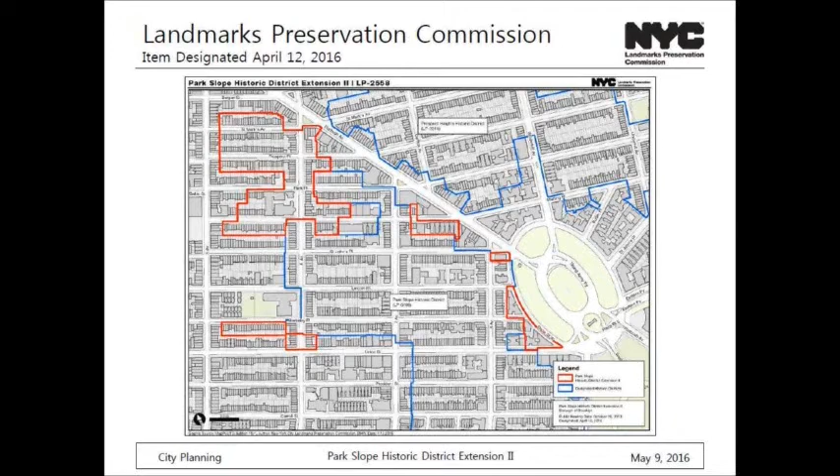This map, although it's a little difficult to see, outlines the existing Park Slope Historic District, the extension we did previously in 2012, and the extension 2 we're looking at today. It's a comprehensive map of the 5 sections of all the districts. The northern parts outlined in red are what we're looking at today. The first Park Slope Historic District extension, located to the south and east on this map, was designated in 2012. And the second extension today brings the total landmark buildings in Park Slope to 2,853.

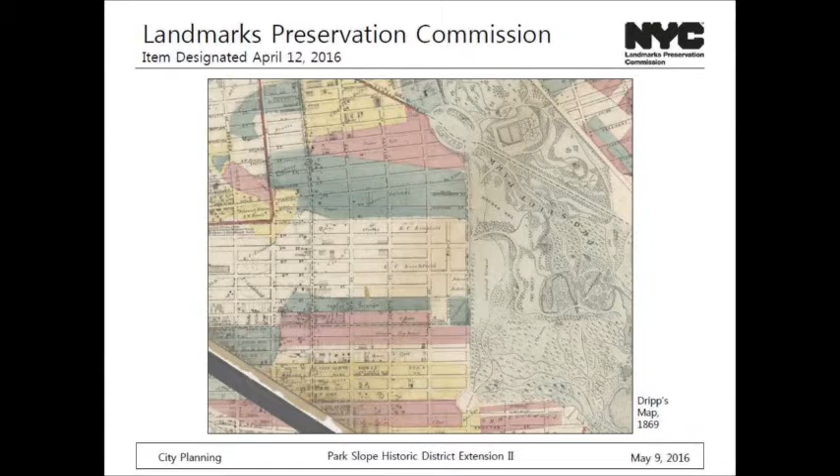The 2 most important features and factors that contributed to the growth of Park Slope during the late 19th century were transportation improvements and the development of Prospect Park, which opened in 1871. Residential development started in the area in the 1860s, close to Flatbush Avenue, as transportation improvements opened new links between Park Slope and the ferries along Brooklyn's waterfront.

The district steadily developed into masonry row houses between 1870 and the early 1900s. The interplay between the natural slope of the land and the graceful rows of well-designed stone houses make the district unique, like the previously designated Park Slope districts are. This extension also includes distinguished institutional buildings designed by some of Brooklyn's leading architects.

The historic district includes a catalog of mid to late 19th century styles, such as Italianate, Gothic Revival, Neo-Greek, Second Empire style, Queen Anne, Romanesque Revival, and Renaissance Revival style.

The Gothic Revival style St. Augustine's Roman Catholic Church is located at 6th Avenue and Sterling Place. The church and rectory were heard individually in 1966 and again in 1980. They've remained on the Commission's calendar since then and were part of the agency's backlog initiative under this administration. The action taken on April 12, 2016 to designate this district extension afforded the church and rectory landmark status, so these buildings were removed from the calendar of the Landmarks Preservation Commission as they fall within the boundaries of the district.

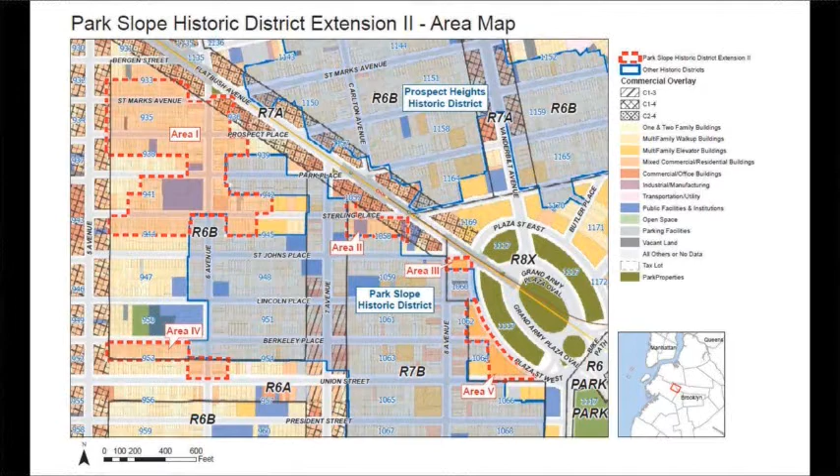Thank you, Jonah. Questions for Jonah? Ms. Efron: Thank you. Since the rezoning happened a number of years ago, were there any incidences the department's aware of economic hardship or other issues we should be aware of as we look at a much larger adjacent area?

I'm not aware of any economic hardships. I can speak to the fact that LPC held a public hearing, and there were groups of property owners and tenants who testified in support.

That's very good to hear. I'm not aware of any. Were there any testifying against it? There was one person who testified against it and deferred to staff from LPC.

Okay, great, thank you. Any other questions for Jonah? If not, this will go to a public hearing. Wednesday? Yes, Wednesday.

Thank you. So let's now move to item number 2, page 21. It's a series of proposed zoning text and zoning map amendments, special permits, and authorizations to facilitate the proposed special Hudson River Park District and the redevelopment of 550 Washington Street.

Our presenter is Carolina G. Hall, who is the lead project planner for the Manhattan office. We're on item number 2, page 21. Good afternoon, Commissioners. Today I'm presenting 2 applications for actions that are being proposed concurrently.

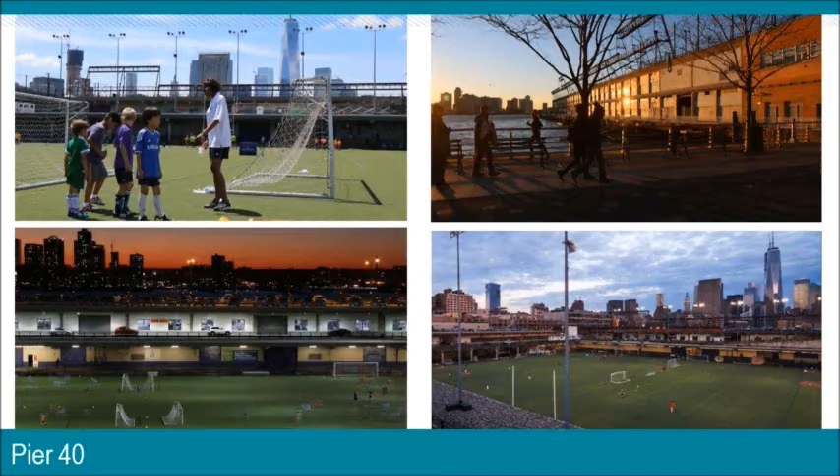As has been widely reported, Pier 40's piles and roof are significantly deteriorated. A 2015 engineering study found that more than half of the pier's 3,500 steel piles are in either severe condition or needing major repair. This is an image of one of the piles. Poor roof conditions have forced closure of parking areas, further limiting revenue. This is an image of an area of the pier closed due to deterioration. These are as much structural concerns as they are a threat to the financial viability of the larger park.

The Act does permit Pier 40 to be used for park commercial use. After 2 unsuccessful requests for proposal to redevelop the pier, and with the support of elected officials, the state amended the Act in 2013 to allow the sale of unused development rights to properties within 1 block east of the park, only to the extent permitted by local zoning law. The Act further requires that any revenue generated from the sale of these development rights be used first to repair Pier 40. The zoning text amendment proposed by the Department of City Planning would establish the Special Hudson River Park District to enable the transfer of floor area from Pier 40 to the receiving development site at the St. John's Center.

Pier 40 is located in the Hudson River at West Street and West Houston Street. The zoning lot, which includes land underwater, is 1.1 million square feet. The footprint of the pier structure, used to determine allowable floor area, is 672,328 square feet. The zoning lot is currently constructed with 2 stories and 673,000 square feet of floor area, so roughly half of its floor area is currently used.

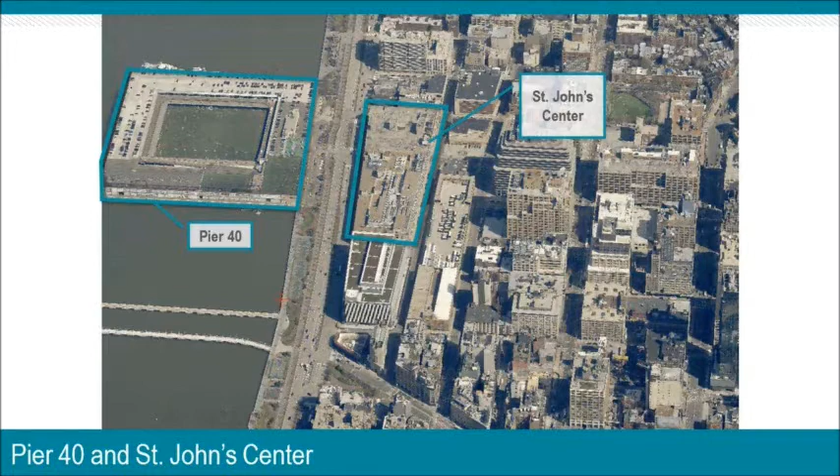The St. John's Center, or terminal site, across the street at 550 Washington Street, is a 213,654 square foot lot that spans 2 partial blocks between Clarkson, West Street, Washington Street, and a line just north of Spring Street. To the south is a sanitation facility. The single tax lot and zoning lot is bisected by West Houston Street, a mapped street, viewed right here. Deducting the area of the street, the zoning lot is 196,410 square feet.

The existing building was constructed beginning in 1934 and served as the southern terminus of the High Line, with railroad tracks entering the building on its 2nd floor. It is 4 stories and bridges over West Houston Street, which has 3 stories above it. The northern portion above West Houston Street is largely vacant. The southern portion of the building is currently occupied by back office communication uses and serves as a temporary event space.

Ground floor retail lines many of the main corridors, including Christopher, Hudson, Greenwich, and Canal Streets. Some manufacturing uses are still active on neighboring blocks. UPS operates a distribution facility on the super block just east of St. John's Center, and Federal Express has 2 smaller facilities just across to the north of Clarkson Street. Directly abutting the St. John's Center to the south is a newly opened Spring Street Department of Sanitation garage with a salt shed across at Spring Street.

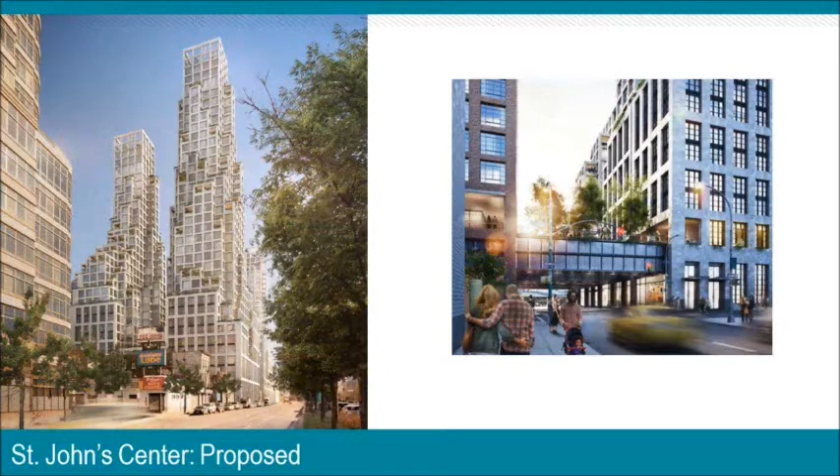The single zoning lot has been separated into 3 distinct sites: the north site, bounded by Clarkson Street, West Houston Street, and Washington Street; the center site, which extends for 406 feet to the south of West Houston Street; and the south site, which abuts the sanitation garage.

Beginning with the north site, it's proposed to include 2 buildings: the northwest building, fronting largely on West Street, Clarkson, and West Houston Streets, and the northeast building, fronting primarily on Washington Street. The northwest building is proposed to include 450,000 square feet of residential floor area and 100,000 square feet of retail space on the building's lower floors.

The building's main entrance is sited on Clarkson Street, and retail is accessed from West Houston Street. The building's street walls would rise between 91 and 127 feet, and then taper to one tower of 430 feet closer to West Street and one tower of 360 feet closer to Washington Street. The building is designed to graduate mass vertically to two tower tops of no more than 50 by 50 feet.

The northeast building on Washington Street, the second building on the north site, is 110,000 square feet in area and 175 feet tall. All the floor area in the building is proposed to be affordable to senior residents with incomes up to 80% of AMI. The applicant additionally proposes a 236-space accessory garage accessed by a 22-foot curb cut on West Street beneath the north site.

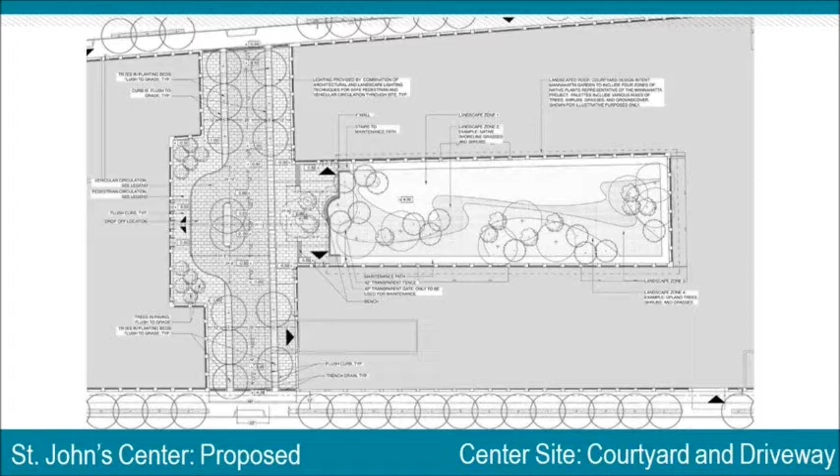The south site is 40,660 square feet in area and borders the Department of Sanitation garage to the south. The building is proposed to include 222,000 square feet of either office or hotel space, or a combination of both, plus 40,000 square feet of retail or event space.

A hotel on the site would rise to a maximum height of 240 feet on a low, full-coverage base. An office building would likely be lower than 240 feet, with larger floor plates throughout the height of the building. The envelope has been designed to allow both options.

On the ground level, the commercial building is separated from the sanitation garage by a service alley that will be used for loading and valet access, should the south site building be a hotel.

The cellar-level accessory garage is also proposed, with 164 spaces, and would be accessed from a 22-foot curb cut on West Street.

The Department of City Planning proposes an amendment to the zoning resolution to establish Article 8, Chapter 9, the Special Hudson River Park District, which would encompass Pier 40 as a granting site and St. John's Center as a receiving site.

Separately, the private applicant is seeking actions to develop the St. John's Center as described. The Special Hudson River Park District aims to facilitate the repair and rehabilitation of piers, bulkheads,

and infrastructure within the Hudson River Park, facilitating their maintenance and development through the transfer of development rights within the Special Hudson River Park District. It also aims to promote an appropriate range of uses that complements Hudson River Park, and, to the extent housing is included, to serve residents of varied income levels. As is consistent with all special districts, it also aims to promote the most desirable use of land and development in the area.

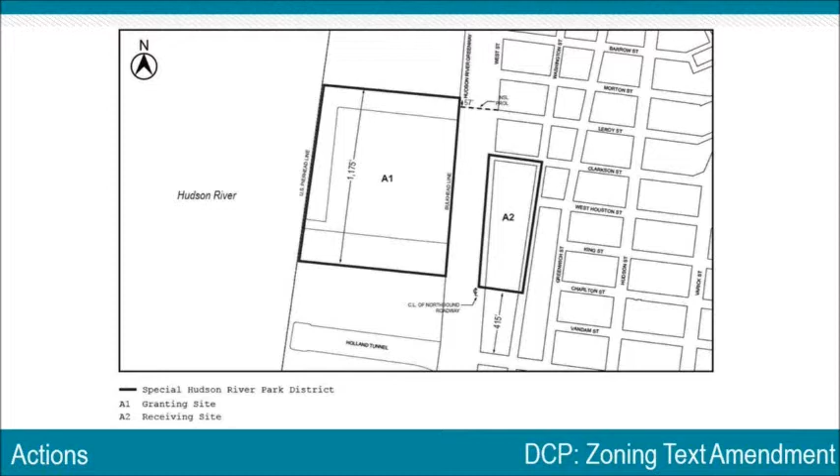The proposed text anticipates that, with the special permit, the owner of the receiving site may concurrently seek a zoning map amendment to allow additional uses or greater floor area. The proposed text conditions the effectiveness of the new zoning districts on the special permit. That is, absent construction pursuant to the special permit and the transferred floor area, the receiving site is restricted to the manufacturing zoning district regulations in place today.

There are requirements and conditions of the special permit. The Hudson River Park Trust must submit a letter to the commission identifying improvements and stating that the funds associated with the transfer of floor area, in addition to any other funds, are sufficient to complete the identified improvements.

The transferred floor area may be no greater than 20% of the underlying floor area permitted on the receiving site. The granting site and park improvements must be in the same community district as, or within half a mile of, the receiving site. And, very significantly, if the development on the receiving site includes residential floor area, the program must include affordable housing in accordance with mandatory inclusionary housing.

The grant of the special permit is contingent on a set of findings with respect to the furtherance of Hudson River Park's repair, maintenance, and development, and on the receiving site, an improved site plan and building design, complementary uses, provision of light and air to surrounding streets, and the appropriateness of bulk modifications in relation to park improvements, and the ability of the project to support the objectives of the inclusionary housing program.

The Special Hudson River Park District also creates 2 chairperson certifications to ensure that no building permits or certificates of occupancy can be issued until the chair has certified that the receiving site owner and the trust have executed a payment schedule and that payments are maintained in accordance with that schedule.

The private applicant also proposes several actions, including the zoning map amendment, a special permit pursuant to the New Hudson River Park Trust Act text, a special permit for additional parking for 3 parking facilities, 3 authorizations for curb cuts, as well as a chairperson certification.

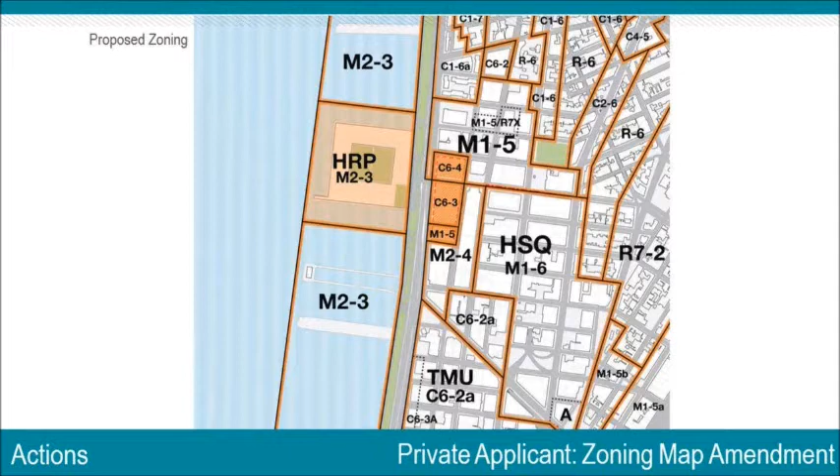As noted, the new zoning districts, if granted, would be ineffective absent the use of the special permit. The private applicant seeks a special permit pursuant to Section 8921 in the Special Hudson River Park text proposed by the Department of City Planning.

The special permit would allow the transfer of 200,000 square feet from Pier 40 to the St. John Center. Pier 40 is zoned an M2-3 district with 2 FAR and 1,344,656 square feet of floor area, of which 671,582 square feet are unused today.

200,000 square feet constitutes 13.2% of the floor area permitted by the underlying regulations on the receiving site. The transfer floor area would enable improvements to Pier 40, in support of which the trust has provided a letter to the commission. Under the special permit, the applicant also seeks modification of bulk requirements.

In terms of height, the proposed C6-4, C6-3, and M1-5 districts allow heights regulated by the sky exposure plane. On all 3 sites, the proposed building envelopes penetrate the sky exposure plane as measured from the zoning lots bounding streets, including West Houston Street.

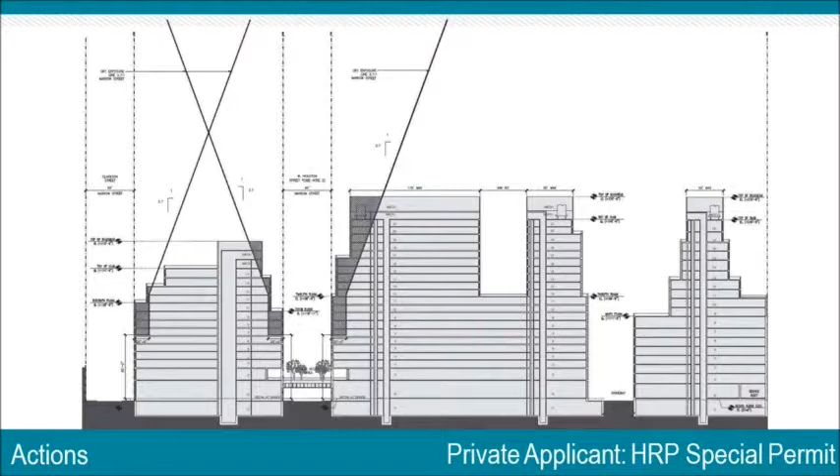A waiver of street walls is also sought. In C64, C63, and M15 districts, all districts permit a maximum base height of 85 feet.

Adjacent Special Hudson Square district regulations allow street walls of up to 150 feet on wide streets and 125 feet on narrow streets. The north site is proposed to include buildings with street walls of between 115 and 129 feet.

The center site would include street walls of between 102 and 209 feet, and the south site has street walls of 112 feet.

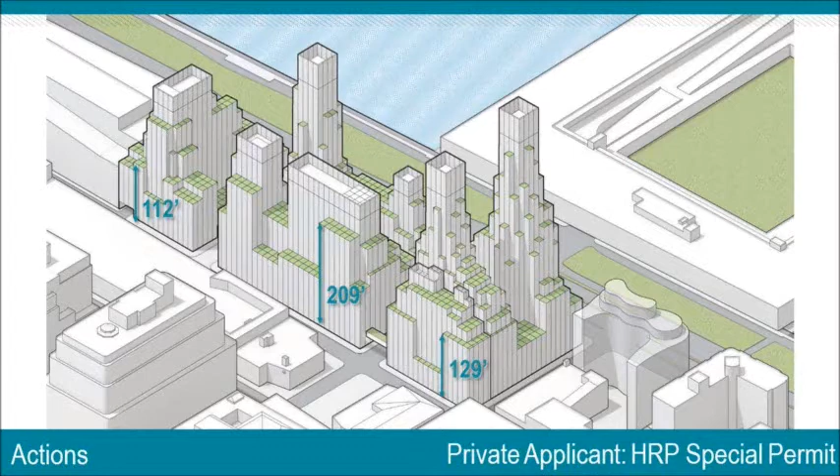Many of these street walls incorporate lower recesses to articulate the facade and match the character of nearby lofts. The street walls are also proposed to reflect the height of adjacent structures like the sanitation garage to the south.

The center site is proposed to be zoned in a C63 district where height factor regulations consider floor area, building height, and open space to encourage a tower in the park with smaller footprints and taller building heights.

The center site is proposed to be constructed with 7.52 FAR plus the transferred floor area. Based on this proposed floor area, height factor calculations would permit a lot coverage of 56,000 square feet, whereas the center site buildings would have a lot coverage of 67,000 square feet. As shown here, therefore, a waiver or modification of height and lot coverage requirements is sought.

The south site building, proposed in an M15 district, is designed not to include a 40-foot rear yard that would be required in the middle of the block, as shown here in the shaded area. The required rear yard is suitable for a typical street context to provide separation from neighboring buildings. However, the site plan and building design include separation from neighboring buildings here.

Typically, special permits that are not vested expire after 4 years. Given the size and complexity of the development, existing site conditions that will require substantial work before foundation is constructed, as well as current tenancies on the site, the applicant asks that the commission grant the special permit for a period of 10 years rather than 4 years.

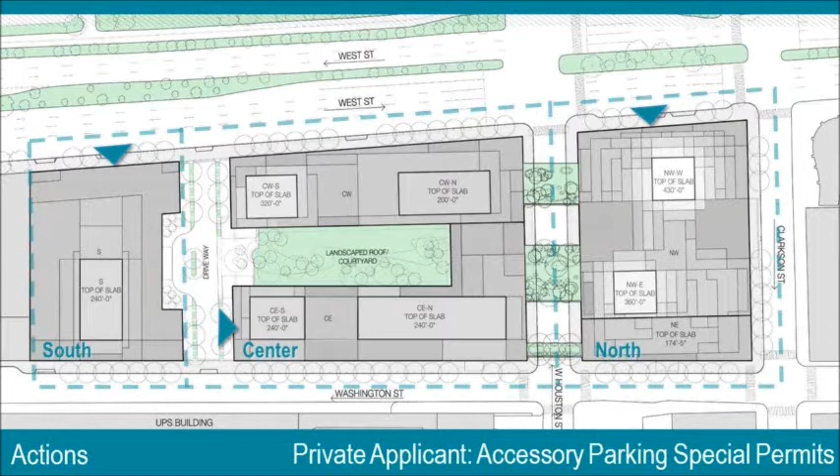The applicant seeks 3 authorizations pursuant to Section 13-441 to allow curb cuts on West Street, a wide street, at 3 locations: one to access the north site garage, one in order to access the through-block driveway along West Street, and another 22-foot curb cut to access the south site garage.

Finally, the applicant is also seeking a chairperson certification pursuant to the new Special Hudson River Park District, Section 89-21, to ensure that building permits may only be issued by the Department of Buildings once a payment schedule associated with the transfer of floor area has been jointly executed by the owner of the receiving site and the trust.

So with respect to environmental review, the DEIS identified significant adverse impacts with respect to vehicular traffic, open space, construction, air quality, and noise. The traffic analysis identified the potential for significant adverse impacts at up to 11 intersections for the proposed project. Unmitigated impacts remain at up to 5 locations.

Any additional mitigation will be explored in consultation with the Department of Transportation between the draft and the final EIS. The proposed actions would additionally reduce the total and active open space ratios. Potential mitigation measures will be explored between the draft and final EIS with the Department of Parks and Recreation. Equally, the potential for construction, air quality, and noise impacts will also be further explored between the draft and final EIS.

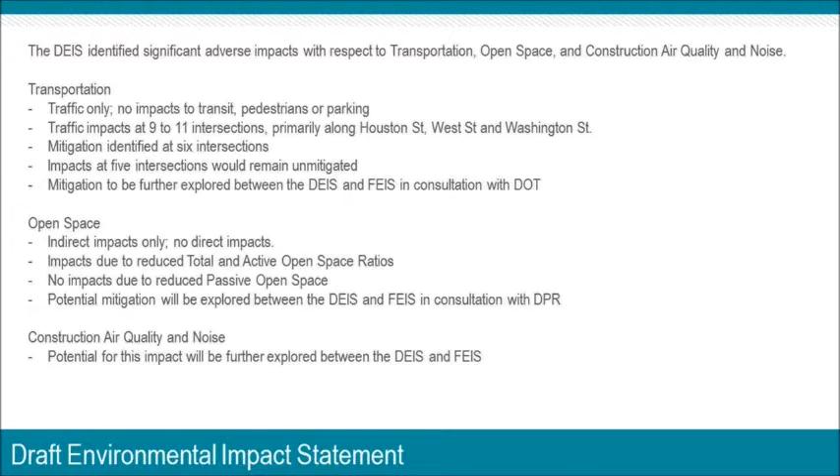In summary, the proposed text amendment by the Department of City Planning and actions by the private applicant will help enable the repair of Pier 40, a critical asset to Hudson River Park, will revitalize a large and prominent waterfront site near Hudson Square, and will contribute to the diversity of the city's housing stock.

Thank you very much, Carolina. That was extremely well done and comprehensive. Questions? No questions. That was really a remarkable performance.

Mr. Cantor. I'm not gonna let her get away that easy. Good show. Question, please.

What is the tallest buildings immediately east of the highway, currently? I'm trying to learn what these two towers, particularly the two tallest towers, how they relate to anything else along the waterfront. I'll go to you. Yeah, that would be a good slide.

So currently, the tallest building, I believe this building in the Special Hudson Square District, rises to 260 feet. The highest portion of the buildings proposed would rise to 430 feet. 430 feet is also the proposed or permitted height at Duarte Square in the Special Hudson Square District, located on Canal Street and Avenue of the Americas, two wide streets. Similarly here, West Street is a wide street, also located on the water, affording an opportunity to locate a taller building.

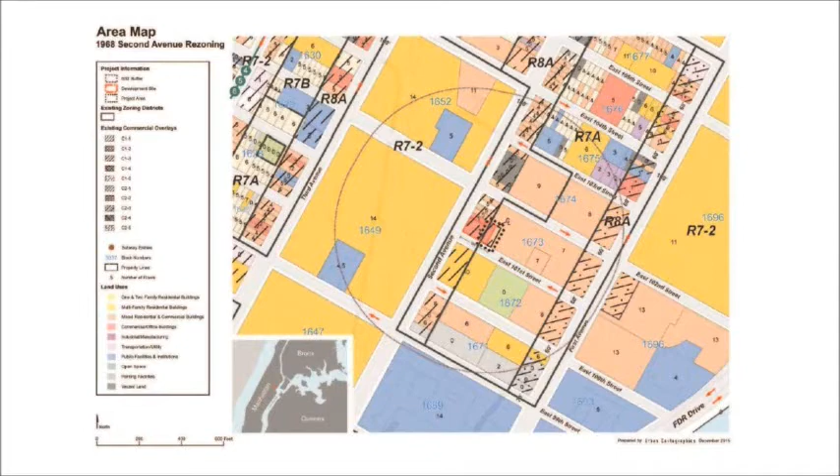The site is located on the east side of Second Avenue, between East 101st and East 102nd Street. The site is also situated on part of lots 1 and 6 on block 1673. On site currently is a 2-story commercial building with a mezzanine, a cellar, and a loading dock located on East 101st Street. The second floor contains vacant office space, and there is a supermarket on the ground floor which uses the mezzanine, the cellar, and the loading dock.

As you can see, the loading dock is on the lower left-hand side of the picture, and is currently located outside of the commercial overlay, along with a portion of the entire building, which is outside of the commercial overlay.

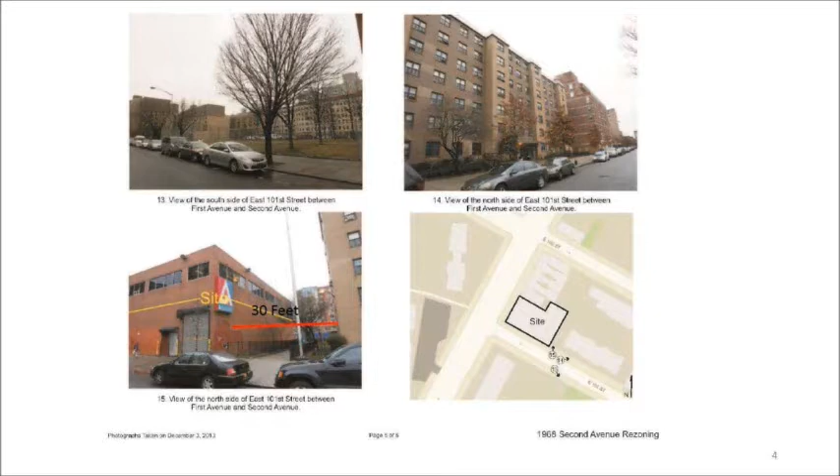Lot 1 is completely occupied by 1968 Second Avenue. And this is Second Avenue, of course, and this is 101st Street. The building is 34 feet 6 inches tall and contains approximately 29,990 square feet, and the loading dock is located 125 feet from Second Avenue.

The commercial overlay only extends 100 feet into the block, so the red line represents where it currently is located. The extension of the C1-5 commercial overlay would extend that overlay 55 feet into an R7A zoning district and give the loading dock the required 30 feet distance from a residential district, and it will cover the remaining 25 feet of the two-story building which is currently located beyond the commercial overlay.

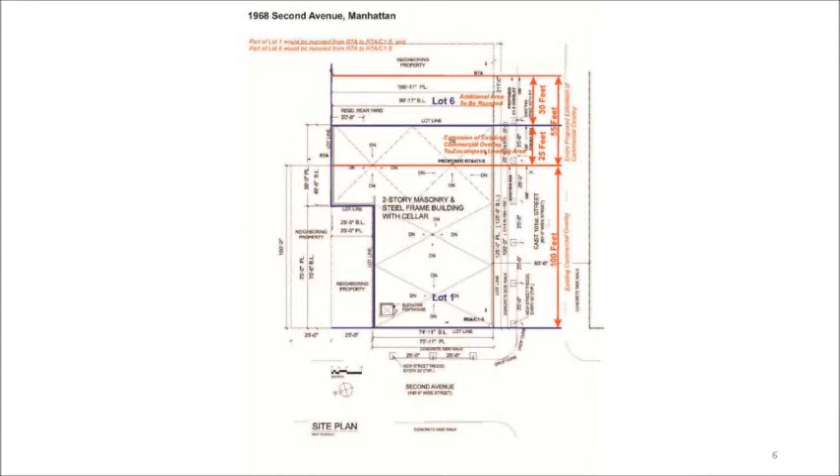Because the proposed zoning map amendment is sought only to bring the existing building into conformance and compliance, the proposed action is not intended to result in any new development or enlargement of the building on the site.

Questions? More questions on this than on St. John's. All right, I'm going to start with Ms. de la Uz. It's a short one.

I just have a lot of supermarket on my mind lately. Do we happen to know what the remaining length of lease is for the existing supermarket operator? And is there any thought to, if this were to move forward, ensuring that the supermarket use would continue? Well, the supermarket's been here for 11 years. I don't know if there is any thought to changing the use, but as far as my knowledge today, I would say no to that.

That would be a concern. Ms. Levin.

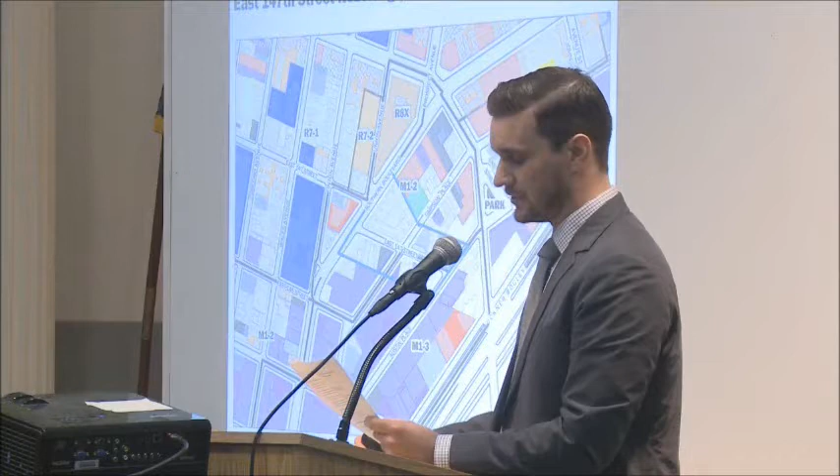In addition, the area contains several vacant lots, 2 small residential buildings of 3 stories, located on the corner of East 145th and Timpson, surrounded by vacant lots and 1-story garages. To the west, several 6 to 8-story apartment buildings line Union Avenue between 149th and 147th Street.

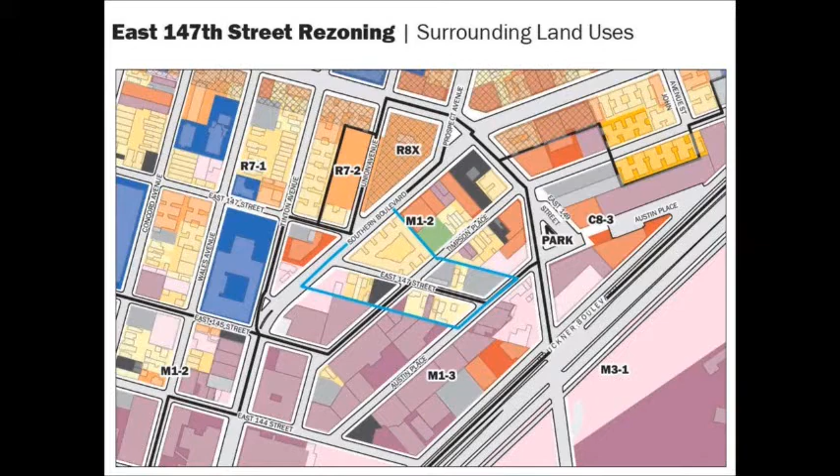North of the project area are M12 and R71 districts with a C14 overlay along Prospect Avenue and Southern Boulevard. This area contains 1-story commercial buildings, a funeral home, a house of worship, and 4 and 5-story mixed buildings. Additionally, a 14-story residential building is currently under construction on the corner of 149th and Prospect Avenue, the project previously referred to as Crossroads Plaza.

The existing zoning within the rezoning area is M12 and M13. Currently, M12 districts allow the development of industrial and commercial uses up to 2.0 FAR, and the M13 district allows these same uses up to 5.0 FAR. Each district allows some community facility uses up to 4.8 and 6.5 FAR, respectively.

Neither district requires side yards, but both require 20-foot rear yards. M12 districts allow front walls of 60 feet or 4 stories, whichever is less, before requiring stepping back in accordance with the sky exposure plane. And the M13 district allows front walls of 85 feet or 6 stories, whichever is less, before requiring stepping back in accordance with the sky exposure plane.

Each district requires parking, the amount of which depends on the use, ranging from one space per 300 square feet to 1 space per 1,000 square feet.

The proposed R7X district would permit residential uses up to 6.0 FAR in inclusionary housing districts, as is proposed here, with a height limit of 145 feet. 1 parking space is required for every 0.5 units, with no parking requirement for income-restricted units. The R7X district would not impose a requirement for a side yard, but would require a 30-foot rear yard.

A proposed C14 district is proposed along Southern Boulevard and would allow neighborhood-serving commercial uses, and within the R7X district, a maximum of 2.0 FAR. The overlay is not associated with the application's proposed development project.

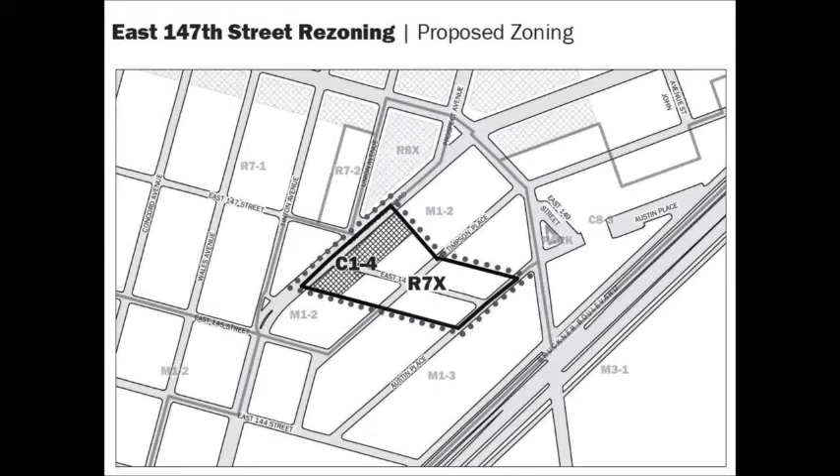The proposed development site is a combination of 4 tax lots totaling just over 24,000 square feet, on 147th Street's northern frontage between Timpson and Austin Place. The site is currently zoned M12, and currently contains a one-story parking garage and surface parking totaling approximately 50 spaces. Additionally, there are two lots of the development site that contain small unoccupied residential buildings.

The applicant is proposing a 12-story residential building that will rise to a maximum height of 125 feet, totaling 164,000 square feet of development, in compliance with the R7X district's permitted 6.0 FAR.

To facilitate the development of the project, the applicant is utilizing the 4% low-income housing tax credits bond cap and is seeking subsidies from the New York City Department of Housing Preservation and Development and the New York City Housing Development Corporation. The applicant proposes to construct 165 affordable dwelling units under HPD's Extremely Low and Low Income Affordability, or ELLA, program. The proposal includes 25 below-grade parking spaces.

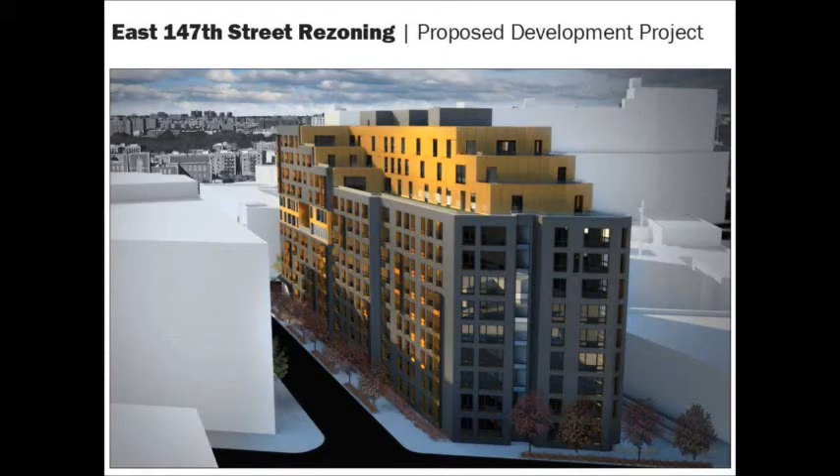The ground floor of the proposed development will consist of a lobby and residential amenities such as a community room and laundry facilities. Typical floor plans include a mix of dwelling unit sizes that range between studio units and 3-bedroom units. The proposed development consists of 3 main vertical sections that create a continuous street wall and rise incrementally.

The building rises in 3 level changes between floors 1 through 6, 6 through 9, and 9 through 12, and peaks at the southwest corner of the development site. The proposed development would have a base height of 85 feet, with floors 6 through 12 stepping back from the building's northern edge, and floors 9 through 12 stepping back from the building's eastern edge.

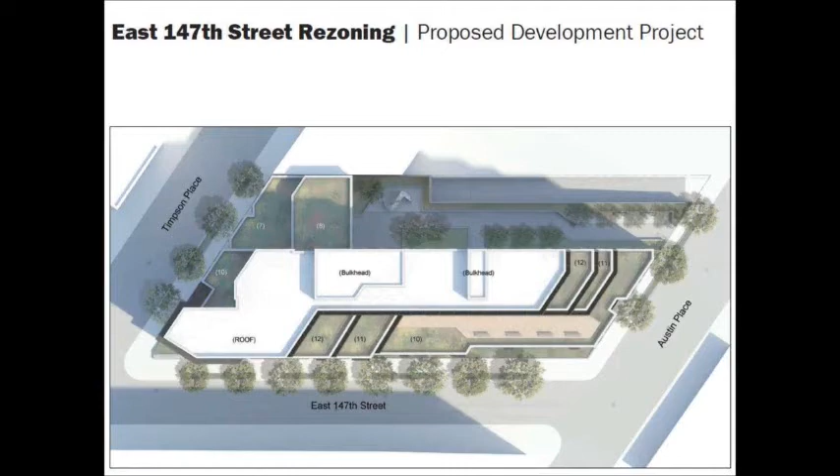In closing, the applicant seeks a rezoning of the project area from M12 and M13 to R7X, and M12 and M13 to R7X/C14. In addition to the proposed mapping action, a zoning text amendment is being proposed to designate the project area as a mandatory inclusionary housing area.

The proposed project is recommending the application of options 1 and 2. The proposed C14 commercial overlay along Southern Boulevard will allow a continuous strip of commercial uses to serve nearby residents, extending from existing commercial uses north of East 147th Street along the east side of Southern Boulevard. The proposed zoning map change is necessary because current zoning does not permit residential uses. Finally, the proposed overlay will allow neighborhood-serving retail to locate along Southern Boulevard.

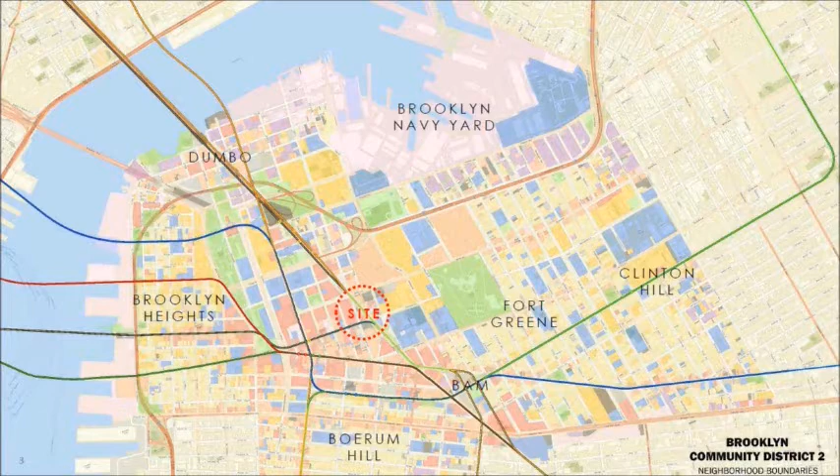Together, these applications would facilitate the development of a new 372,000 square foot mixed retail, office, and residential development located in downtown Brooklyn, Community District 2. The proposed project area is located in the middle of downtown Brooklyn, New York City's third largest central business district, and Brooklyn's burgeoning tech triangle, which includes downtown Brooklyn, Dumbo, and the Brooklyn Navy Yard.

The site, 141 Willoughby Street, is located on a triangular block bound by the 120-foot wide Flatbush Avenue extension, 60-foot Gold Street to the west, and the soon-to-be 75-foot wide Willoughby Street to the south. The Manhattan Bridge is approximately 6 blocks north along Flatbush Avenue extension. Immediately south of the proposed site is the 1.9 million square foot mixed retail and residential City Point development, which is currently under construction, and will also begin construction of Phase 3, which is a 59-story tower about 712 feet along Willoughby Street.

Diagonally southwest is the recently approved 1-acre Willoughby Square open space with a public parking garage below, and the proposed 420 Albee Square office tower development, which is a separate application you're going to hear next on the agenda. Directly west of 141 Willoughby Street is 4 Metro Tech, a 1.3 million square foot, 25-story office building that Chase Bank is an anchor tenant in.

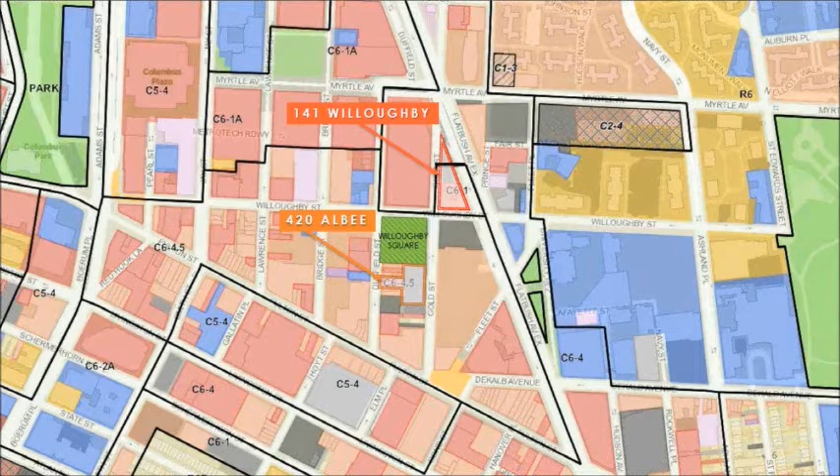The proposed project area was actually slated to be rezoned from the current C61 to a C64 district at that time. However, in response to public testimony by the site's then owner, the Institute of Design and Construction, they requested to be removed from the rezoning, as they had no intention of selling or redeveloping the site at that time. Lot 8 was acquired by HPD in 1989 as part of the Metro Tech URP and was designated for a street widening as part of the Flatbush Avenue Extension enlargement. It was subsequently mapped as street. However, in 2004, as part of the Downtown Brooklyn Plan, the URP modified Lot 8's designation to open space and authorized HPD to dispose of the property.

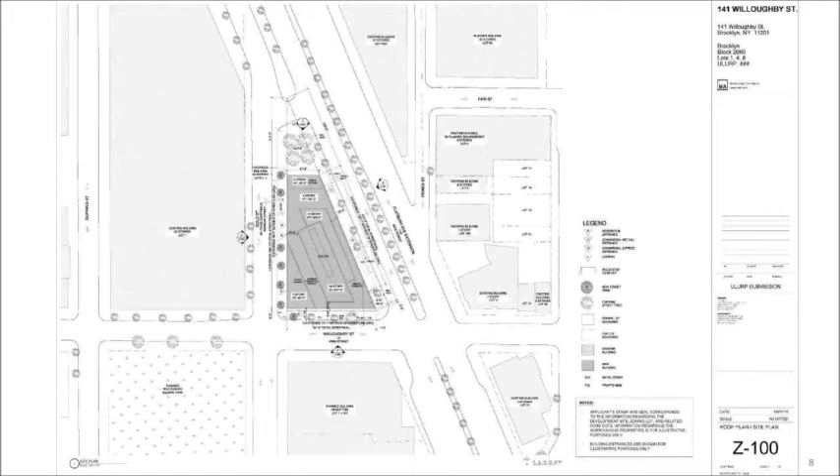If the actions are approved, the applicant, Savanna Equities, is proposing to develop a new 49-story, 577-foot high, 18 FAR, approximately 372,000 square foot mixed retail, office, and residential development on lots 1 and 4, and a publicly accessible open space on lot 8.

The proposed development would include approximately 30,000 square feet of retail across the ground and second floors, approximately 94,000 square feet of office space across 7 floors, and approximately 248,000 square feet of residential floor area, including approximately 74,000 square feet of affordable floor area pursuant to a proposed MIH area.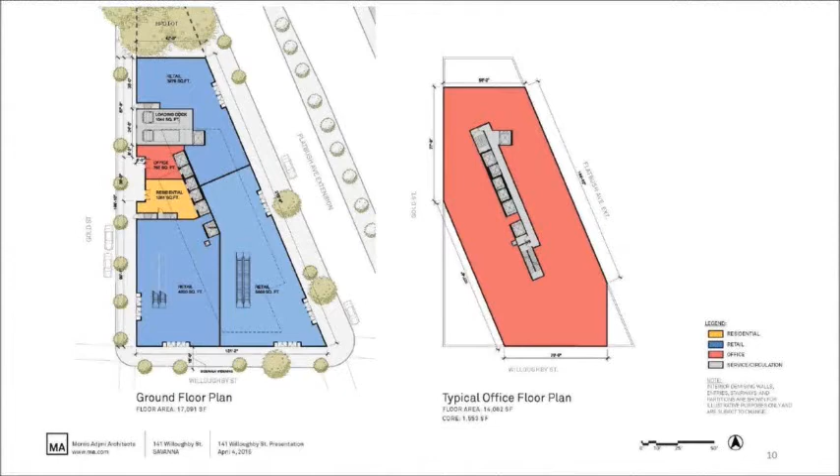This demand and subsequent inability to find office space has caused a ripple effect of office conversions and expansions across Brooklyn's neighborhoods. So this massing shows the proposed retail base and entrances and the office podium with the proposed open space terraces. And here's the location of the proposed publicly accessible open space on lot 8.

This applicant is also proposing to map downtown Brooklyn's first MIH area, proposing option 2, which would require 30%, or approximately 74,400 square feet of residential floor area, to be permanently affordable. As stated before, it should be noted that the existing C61 district has no affordable housing program currently. And the MIH proposal is significantly higher than the current R10 inclusionary housing program that currently exists in downtown Brooklyn, which relies on the older 5 to 6% affordable housing provisions.

So here's a massing showing the proposed commercial podium and residential tower in context. Here's Metro Tech just behind it, which you can see here. And this is the City Point Phase 3 tower just behind it here.

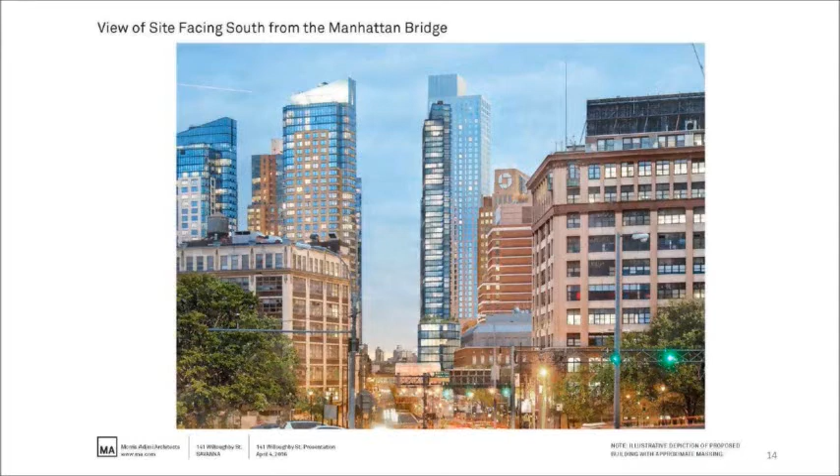So the proposed development site sits at a very prominent location in downtown Brooklyn along Flatbush Avenue Extension near the Manhattan Bridge. This is a view from the Manhattan Bridge landing at Flatbush Avenue in northern downtown Brooklyn.

The proposed development provides a strong street wall along Flatbush Avenue Extension with a lower base height of 40 feet, a small setback, and then rising to 145 feet. A 144-foot linear portion of the commercial base rises sheer from Flatbush Avenue Extension - that's this right here. Flatbush Avenue Extension is 120 feet wide.

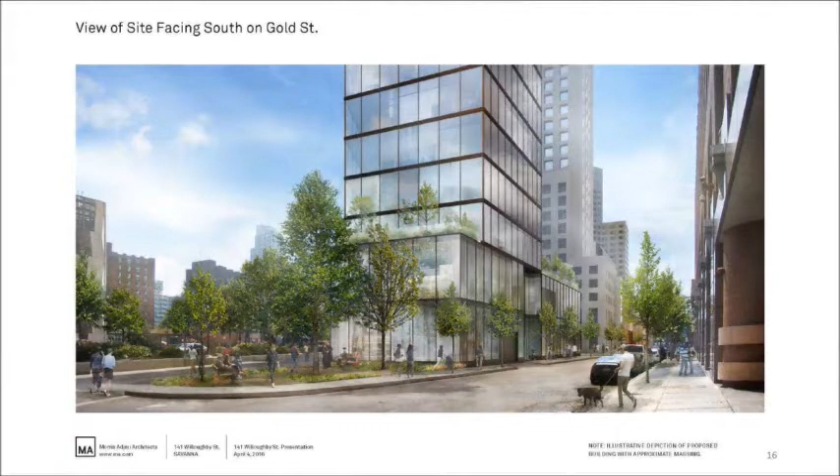The prow of the proposed development provides a slender 40 to 47 foot wide face as one approaches from the Manhattan Bridge. And here's another view of the proposed publicly accessible open space on Lot 8.

The proposed 577-foot tower is in relative context to existing and proposed developments within the immediate area, including new developments topped out on Willoughby Street, City Point's Phase 3, and the proposed 340 Flatbush Extension development, which recently transferred development rights from the landmark Dime Savings Bank to achieve a proposed 1,000-foot tower.

In order to facilitate the proposed development, the private applicant is proposing a zoning map amendment and zoning text amendments, and EDC and HPD are proposing a city map change to demap a portion of Flatbush Avenue Extension over Lot 8.

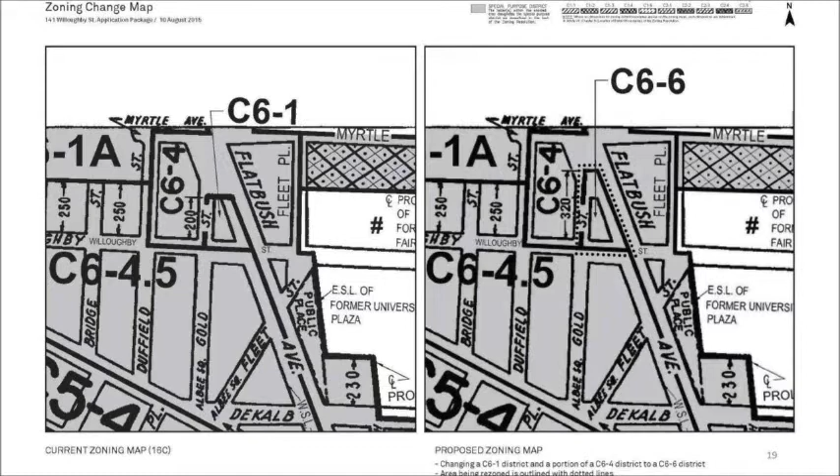This rezoning would rezone a C61 district and a small portion of the C64 district to a C66 district, which would cover all of lots 1, 4, and 8.

In addition, the applicant is proposing text amendments, which include designation of downtown Brooklyn's first MIH area in Appendix F, adding the proposed C66 district to the Special Downtown Brooklyn District, Section 101.

As noted earlier, the existing C61 has no IH program associated with it, and the applicants would develop affordable housing pursuant to any future 421A agreement.

But in this proposed scenario, the C66 district would have an R10 equivalent, in which the applicant is proposing to designate the 30% requirement per option 2, which would generate approximately 81 affordable rental units.

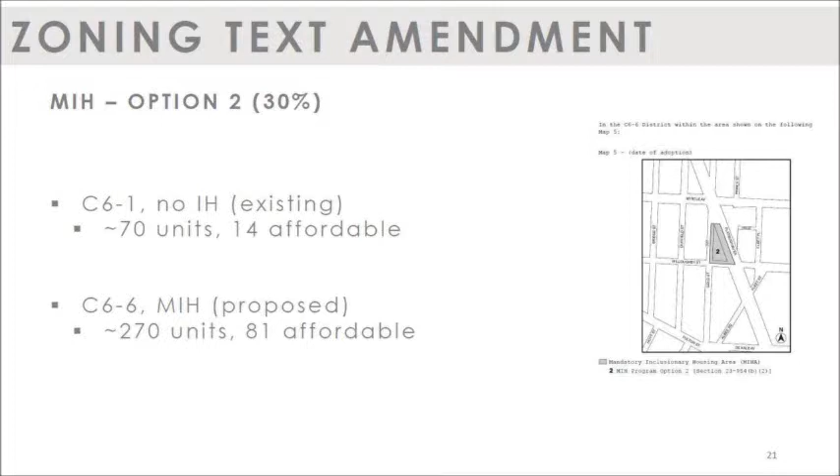The C66 district would allow up to 18 FAR, which would facilitate the creation of a significant amount of office space above ground floor retail spaces.

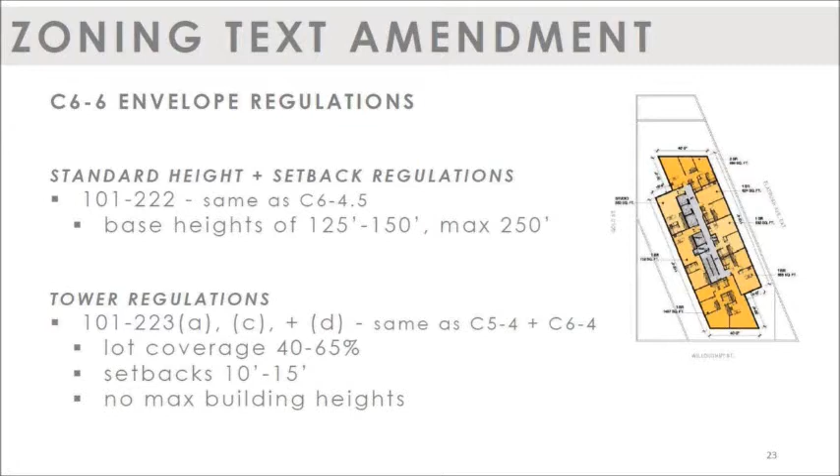The C66 district would have to be added to the Special Downtown Brooklyn District, and therefore modify some of the locations within the envelope regulations applying in the Special Downtown Brooklyn District. It should be noted that the standard height and setback regulations and the majority of the tower regulations would remain unchanged - it's just plugging in the C66 district.

However, related to setback regulations in 101-223 and 101-41, to facilitate the creation of more efficient office floor plates, the applicants are proposing to modify base height and maximum base heights, which are currently 60-foot minimum base heights. They're proposing to lower that to 40 feet, and then allow the maximum base heights to rise to 145 feet. Again, the tower regulations themselves would remain unchanged.

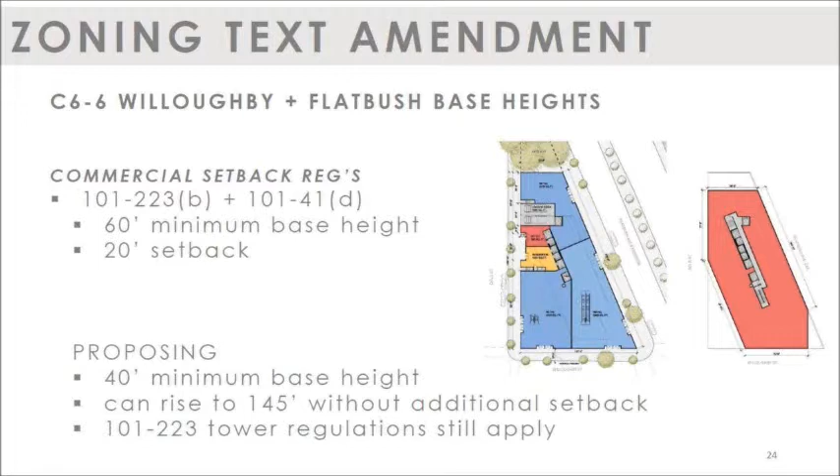Finally, EDC and HPD are proposing to demap a portion of Flatbush Avenue Extension. As discussed earlier, Lot 8 is mapped, mostly unbuilt street. This demapping would unlock nearly 48,000 square feet of development rights, which were pre-approved for disposition in 2004.

In addition, Lot 8 would be removed from HPD's jurisdiction and obligations, and URP and land disposition agreement requirements would keep this space open and publicly accessible in perpetuity.

Because of this, EDC and HPD are proposing to demap all of Lot 8, which includes approximately 2,600 square feet of open space. Here in the hatched blue is what's currently active roadbed and would remain active roadbed, and it's approximately 182 square feet.

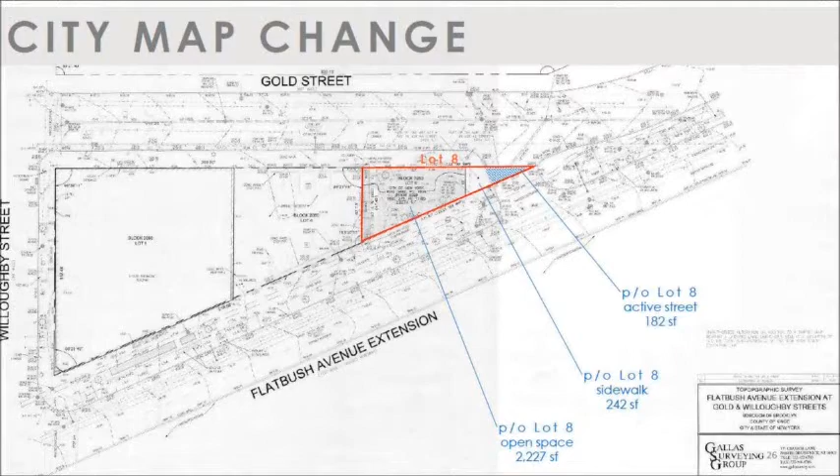In conclusion, these actions would facilitate a new 372,000 square foot retail, office, and residential development, bringing much needed office space and affordable housing to downtown Brooklyn, and furthering the goals of the city's third largest central business district.

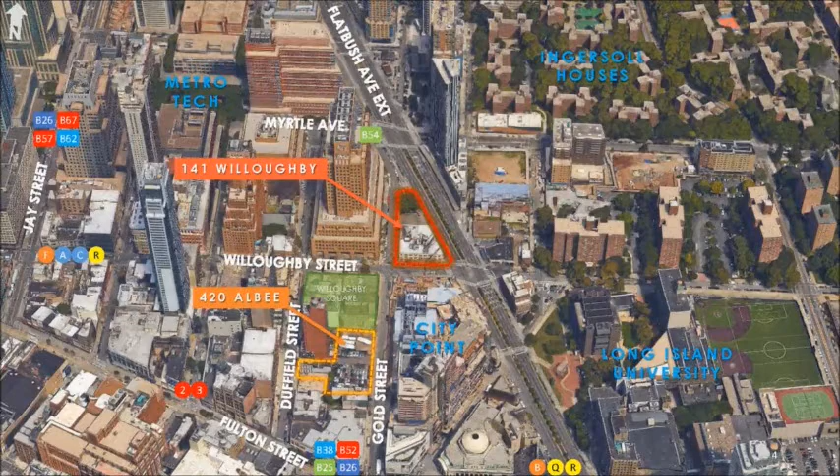As Alex explained earlier, the surrounding area is within the downtown Brooklyn Central Business District. The Metro Tech campus is just to the north. The proposed 141 Willoughby Street application you guys just saw is to the northeast. City Point is directly to the east, and the proposed Willoughby Square is directly adjacent to the north.

The proposed project area is Site 19B in the Brooklyn Center Urban Renewal Plan. The project area includes construction sites for new developments, a 128 key hotel, a 2-story gym, and vacant city-owned properties that are currently being improved as a future site of Willoughby Square open space and public parking garage. That was before the commission last fall.

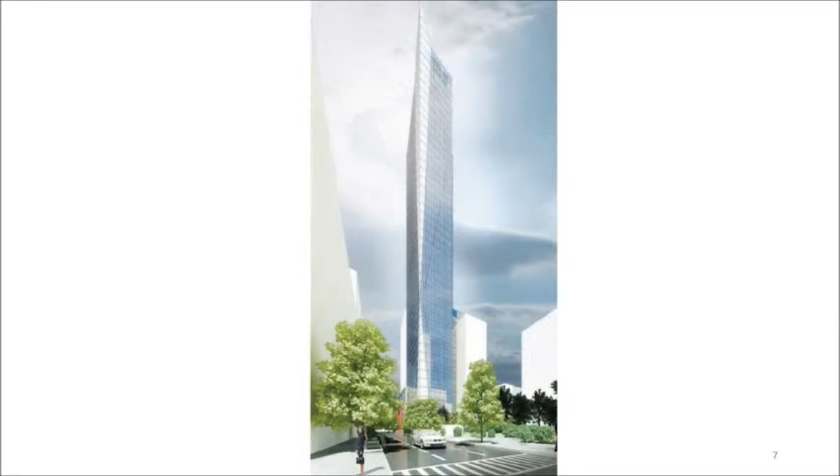The proposed development site is approximately 18,500 square feet, located on an irregular T-shaped site immediately adjacent to and south of Willoughby Square. The proposed new building is 37 stories, 675 feet, consisting of approximately 378,000 square feet of office space.

The proposed development would be as of right under existing use envelope and bulk controls, but for the building bulk controls on Site 19B pursuant to Section C3B of the URP. Section C3B requires any building fronting Willoughby Square to have a 15-foot setback after a maximum street wall height of 85 feet. In order to facilitate the proposed development, the applicants are requesting a minor change to the URP to remove the setback requirement for this site.

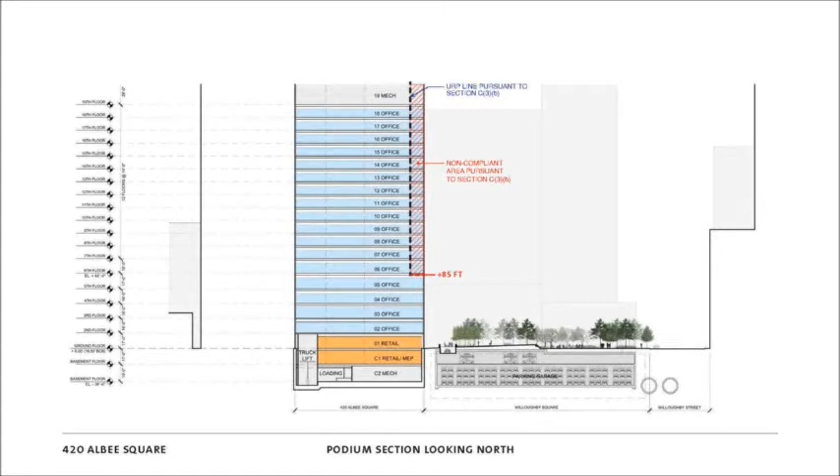The applicants have stated an office development on the proposed development site, given its size and irregular shape, requires relief from the setback control to achieve a reasonable Class A commercial office building floor plate. The applicants are proposing a typical office floor plate of nearly 11,000 square feet. However, the required setback would reduce the floor plate by 900 square feet, which the applicants have stated reduces the efficiency and viability of the proposed development.

In addition to the constraining development site, the applicants have stated 3 other reasons that Site 19B should no longer be subject to the setback control, including modifications to the Willoughby Square design, a reduction in the number of acquired sites fronting Willoughby Square, and evolving street wall conditions in the surrounding area.

The original design of Willoughby Square was modified, enlarging the open space and removing the private drive and adding a dog run and bike parking instead to the southern boundary that borders the development site.

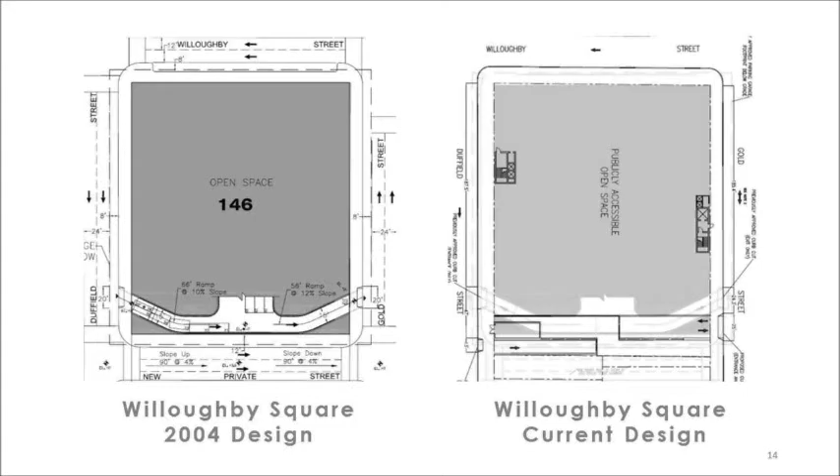Secondly, the intent of the 2004 URP was to facilitate a large floor plate office building along the southern border of Willoughby Square. However, the majority of Site 19B is privately controlled, and the city has no intention of acquiring any more of the 19B sites, therefore reducing the frontage of the office building fronting Willoughby Square by half.

Lastly, the base height datum between 80 to 85 feet was intended to create a uniform ring around Willoughby Square. However, the street wall conditions on the surrounding blocks vary significantly. Heights in the surrounding area range from 30 feet to 210 feet, as these sites were never acquired and are not subject to the URP controls.

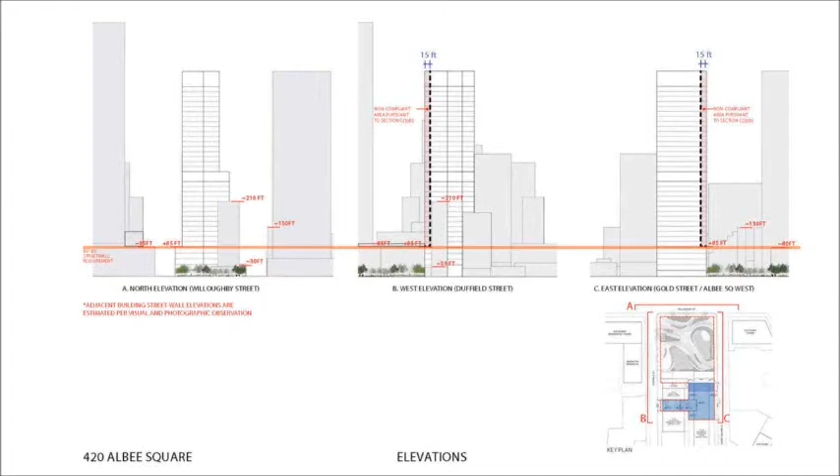In conclusion, in order to facilitate the proposed development, the applicants are requesting a minor change to the Brooklyn Center Urban Renewal Plan to remove Site 19B from the list of sites that are subject to the setback control. The proposed development would introduce a new 37-story, 378,000 square foot office development with ground floor retail at 420 Albee Square in downtown Brooklyn. This ground-up office development would achieve a key goal of the 2004 downtown Brooklyn rezoning.

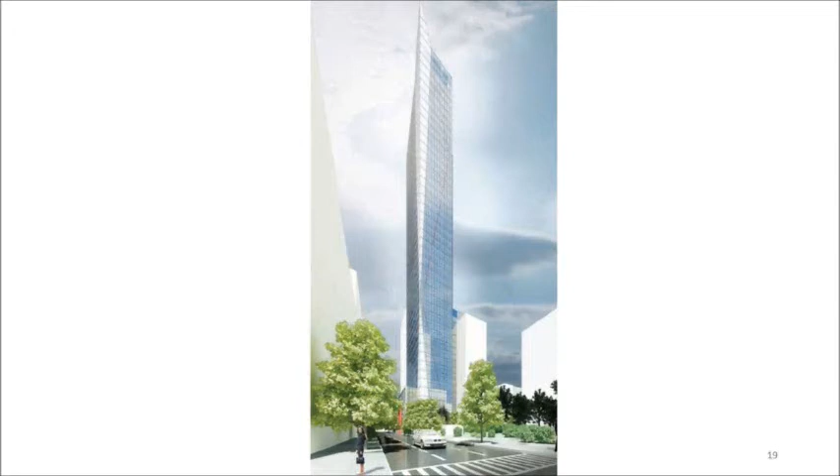That's it? Yep. You didn't end with a real flourish there. You sort of ended. Questions?

Mr. Knuckles. Nearly 700 parking spaces. Nearly 700 parking spaces, 694, for Willoughby Square open space.

It just seems like a lot of space. That's public parking. It's already approved - it's part of the Willoughby Square project.

Mr. Cantor, then Mr. Douek, then Ms. Ortiz. Thank you - you said 675 feet, 37 stories. Yes. How do you break up those floor-to-floor heights? I believe the typical floor height is 10 feet, but the applicants will be here to respond. 10 feet is not going to make 675, and even 15 feet's not going to make 675 for the office building.

We can wait. You can read that.

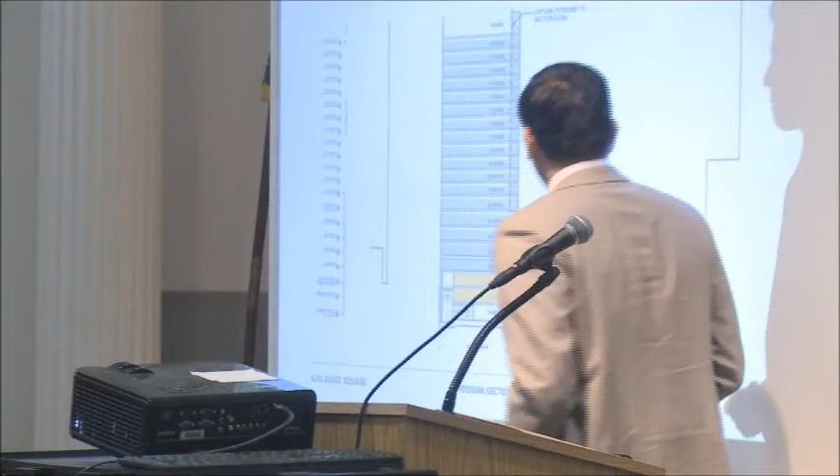I believe they're 15 to 18 feet - part of that total height includes all the bulkheads on top of the building. Includes bulkheads too? So that's 20 feet, 30 feet. The numbers don't seem to add up - it would be good to learn the number. Okay.

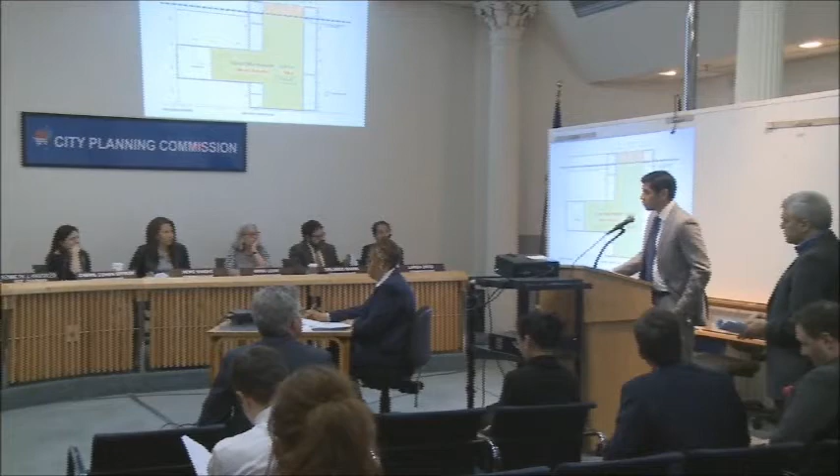Mr. Douek, and then Ms. Ortiz. I'm just concerned about what are we getting in return? I'm not sure that the 15 foot setback is an impediment to the building. I looked at the floor plates you showed earlier, where you went from 10,819 and had a 900-square-foot reduction. So what are we getting in return? And perhaps something can be contributed to the park, to Willoughby Square Park, in accommodation of this? This is a private application - the developers could probably speak to the viability and efficiency of the floor plate, but from their perspective, they have a concern with the reduction in this floor plate.

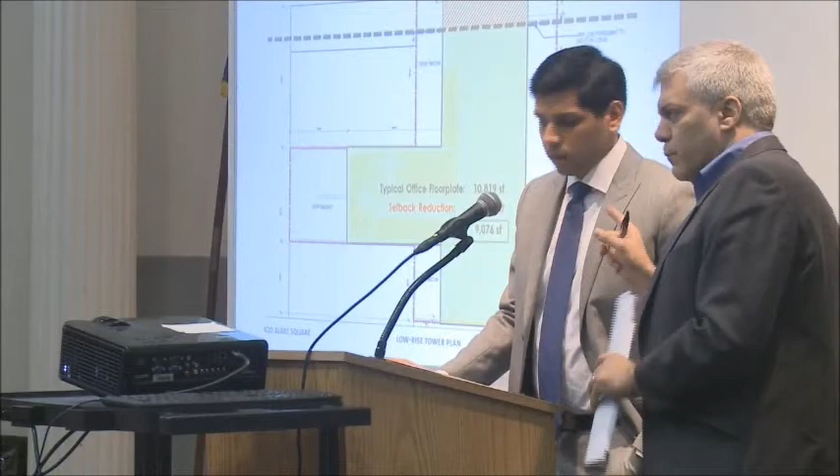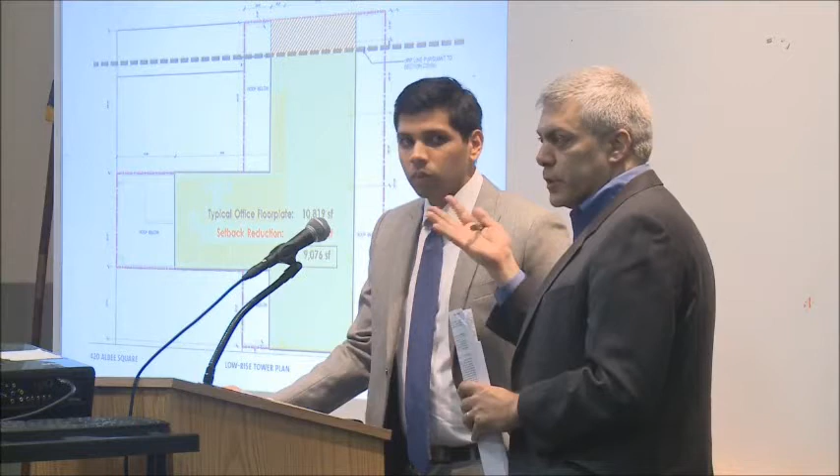As Anand may have already explained, the original purpose of the 15-foot setback was to create a uniform shelf around the open space. Because the city is not proposing to acquire the other half of that frontage on the Willoughby Square open space, this setback no longer really makes sense. It also impinges, as the applicants state very significantly, on the viability of the floor plate. It would also make the building taller because of the floor area - in the meantime, they would go higher.

Right, because you wouldn't have that 900 square feet - it would go necessarily on top of the building. Just to be clear, the elimination of the setback does not increase or decrease the floor area of the building - it's not getting any additional as of development. Right, they could just go as high as they want, pretty much - they could go as high as they wanted to. We should note that this project is utilizing floor area that the city is disposing of and selling to this developer, so the city is gaining a benefit by this floor area from Willoughby Square.

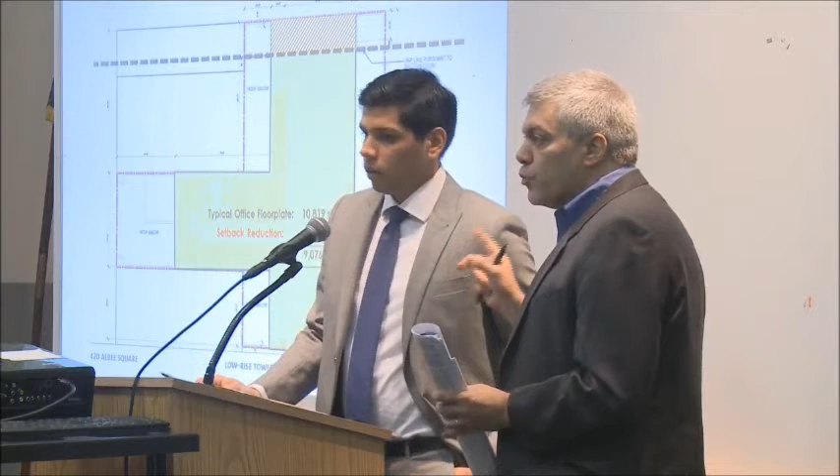So this action - we're not giving them any additional FAR or any additional square feet at all? They are getting additional floor area from the city, by shifting the setback. That's right. Okay, thank you for the clarification.

Ms. Ortiz, and then Ms. Levin. Along those lines, I was just curious, not being familiar with office space, about the argument that 10.8 is significantly better than 9 something - just so we can educate ourselves in the future, understanding what's an ideal floor plate, what kinds of spaces offices are looking for right now. I think that would be interesting and useful information for this.

Ms. Levin? Yes - with respect to the shelf condition, as Winston described it, that was originally behind the setback requirement, what's going on with the sites that didn't get acquired? So what is the condition going to be? Were we to approve this no setback, what's that whole block front going to look like?

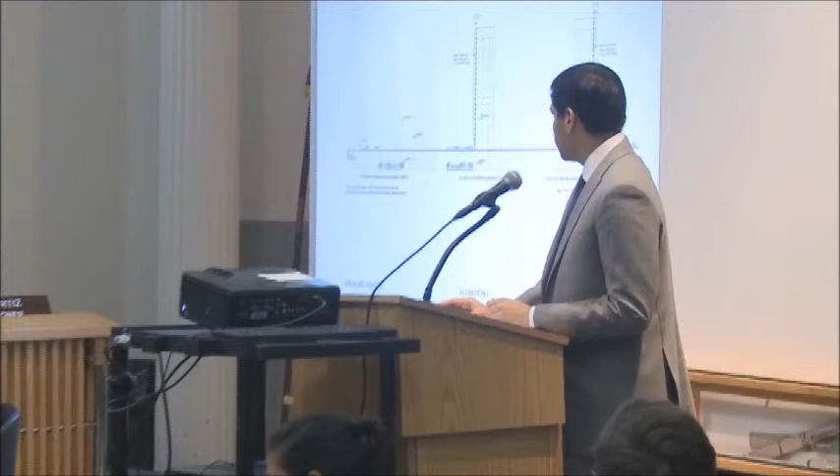Those two sites - the Indigo Hotel was a new development, so it's built and it's not going anywhere, and it's at 210 feet, and it goes straight up. And right in front of that is a 4-story, 30-foot-high building that's also not intended to be acquired by the city and will remain.

I'm sorry, you said how tall it was? How tall is it? 30 feet. So with the setback requirement, we'd have a mismatch anyway - we'd have the 30 feet and the 85 feet. True, you could argue about that, okay, got it. And so then we're going from 30 feet to straight up. Yeah.

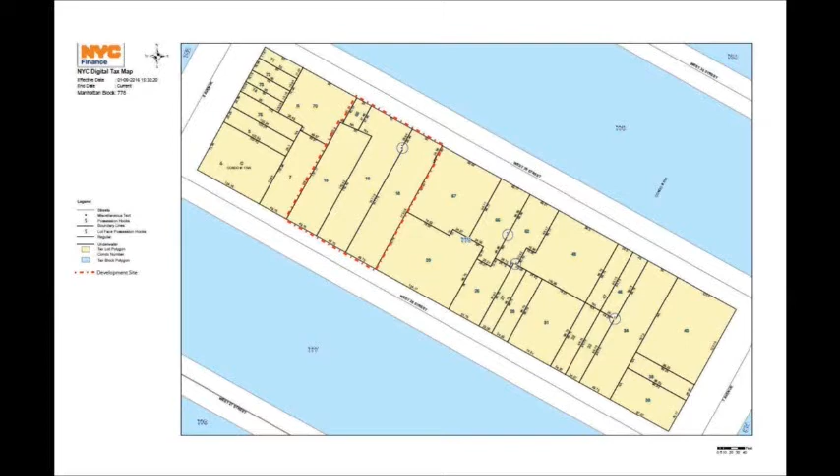All the lots are currently vacant. Lots 13, 16, and 18 were previously occupied by 371 public parking spaces. Lot 66 was formerly occupied by a 2-story building that has been demolished. The site has a lot area of approximately 29,000 square feet.

Now, the development site was subject to 3 zoning actions in 2011: the special permit for a public parking garage, which is the focus of this modification, and an area-wide rezoning and text amendment, along with 48 other tax lots or portions thereof located on the same block and the block immediately to the north. This is the M1-6 here.

The rezoning was from an M1-5 manufacturing district, within which residential use is not permitted, to a mixed-use M1-6D district, which permits residential use under certain conditions. This was the first M1-6D in the city. The intent of it was to encourage new infill residential development while preserving commercial and manufacturing uses in that area. The M1-6D has a 9 FAR for zoning lots containing residences, and it is 10 for those that do not contain residences, and it could be increased to 12 through the provision of lower-income housing through the inclusionary housing program.

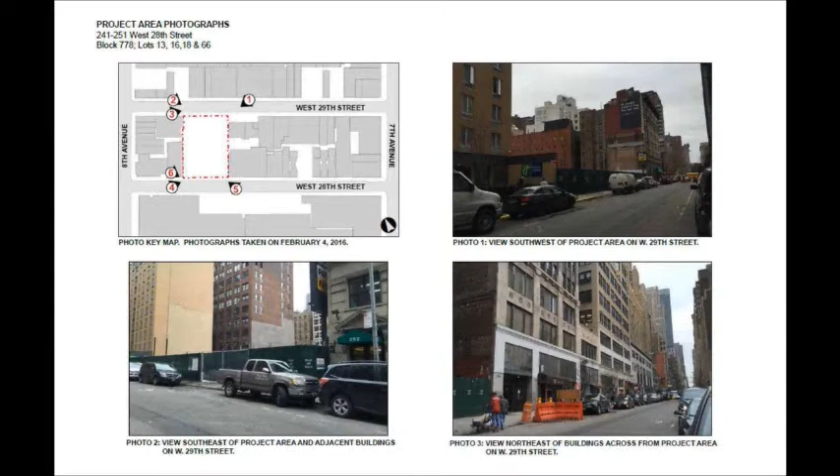We have the project area photos here. You can see from the southwest here, from West 29th Street, you're looking at the open lot. This is the lot we're looking at here. And this is from the southeast, and this is across the street. And this is from West 28th Street, this area here. Number 4, you're looking straight at the site, and that's the Fashion Institute there.

So this is the first of 2 drawings of the previously approved special permit, which allows an attended public parking garage with a maximum capacity of 325 spaces on portions of the ground floor, cellar level, and sub-cellar level. Internal garage vehicle circulation would be provided by ramps. There would be 139 double-height stackers. The parking area would consist of approximately 49,000 square feet.

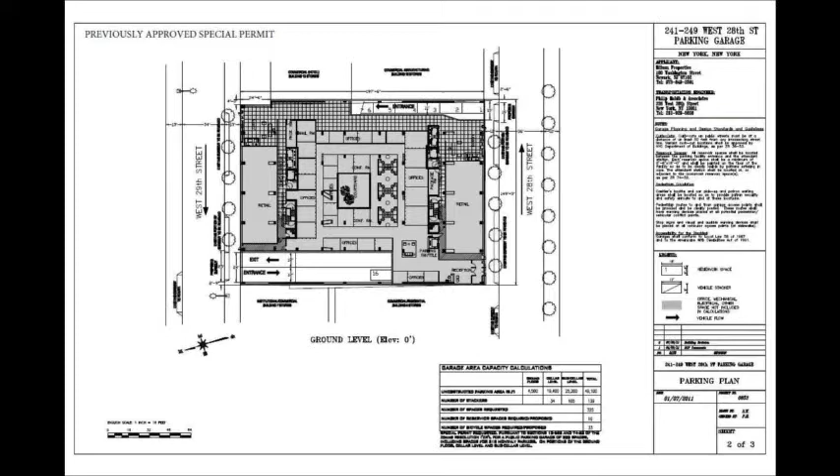Now the applicant is proposing to redesign the garage due to the subsurface conditions. After further investigation into designing the structure, they found that excavation and construction into the bedrock and groundwater 16 feet below ground surface presented additional costs and challenges.

This is an enlargement of the previous drawing. They are proposing to eliminate the subcellar and reduce the number of parking spaces from 325 to 190, including 80 double stackers.

One curb cut would be located here. They moved the curb cut that was there to here with a 16-foot wide curb cut. You have the same entrance on West 29th Street with the 25-foot curb cut, and there would be 10 reservoir spaces.

The parking attendant would receive and send the vehicles down the elevators to the cellar level, where the parking attendant is waiting, and they'd come up the same way where the driver would get their vehicle in the adjacent area by the elevators. All departing vehicles must exit via West 29th Street.

Customer drop-off and the 19 bicycle parking spaces have been moved up into the ground floor. This is bicycle parking here, and this is the drop-off area. The previous design had it at the cellar level. There's also an ADA parking space now on the ground floor, located right here.

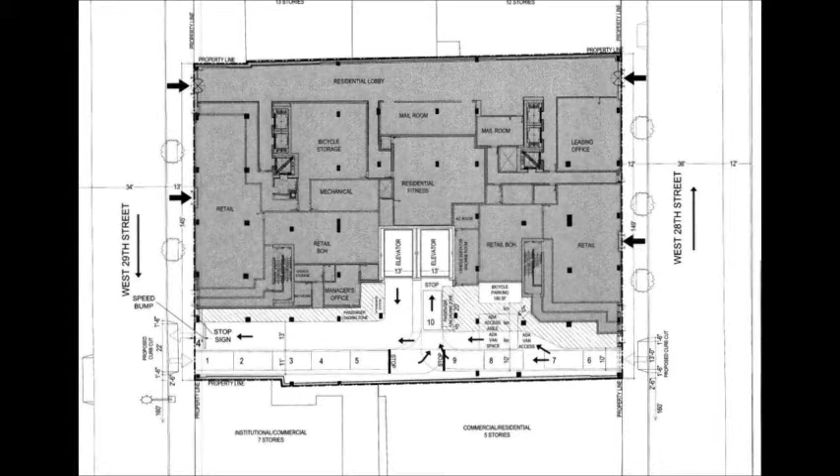The special permit would have lapsed on September 21st, 2015, unless substantial construction had been completed or unless a renewal application was filed. Before it lapsed, the applicant filed the renewal in August of 2015. The applicant seeks modifications of the special permit previously granted pursuant to sections 13562 and 7452 for the public parking garage to reflect the reconfigured design.

The Manhattan Core parking regulations came into effect in 2013, so the garage is subject to the regulations in effect at the time the 2011 special permit was granted.

So 13562 sends us to section 7452, and section 7452 requires the commission to make the following findings: that the use will not be incompatible with or adversely affect growth and development in the area, that the use will not create or contribute to traffic congestion, that the use will draw a minimum of vehicular traffic on local streets, that there are adequate reservoir spaces, and that the street is adequate to handle the traffic generated.

Any roof parking will not impair the essential character or future use of development, and any exempted floor space is needed to prevent excessive on-street parking demand. Now, the applicant met these findings in 2011, and their current statement of findings is attached to your briefing package.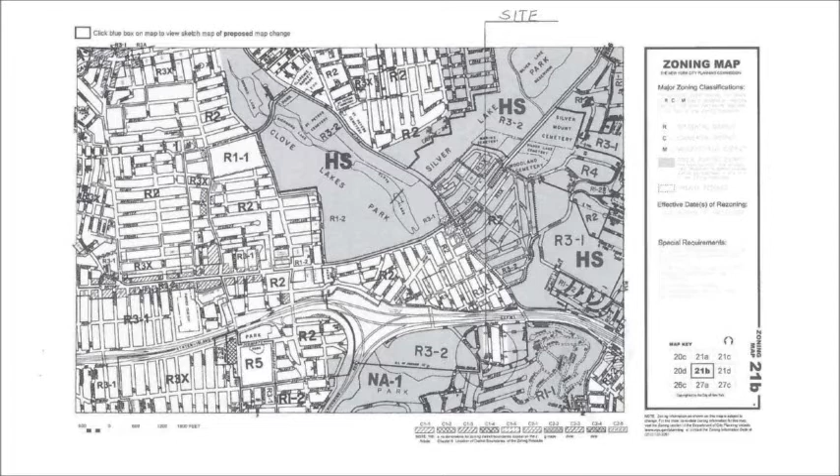The site is presently developed with a detached one-family, single-story ranch-style residence, which was built prior to the establishment of the Natural Area District. This residence will be demolished. There are no prior CPC approvals.

Land uses in the area include a public school in blue, Petrides Complex nearby to the west, the Staten Island Expressway about 800 feet to the north, and also to the north are some single-family detached residences, and to the east, detached and semi-detached residences where you can see the smaller building footprints, and to the south, detached single-family residences.

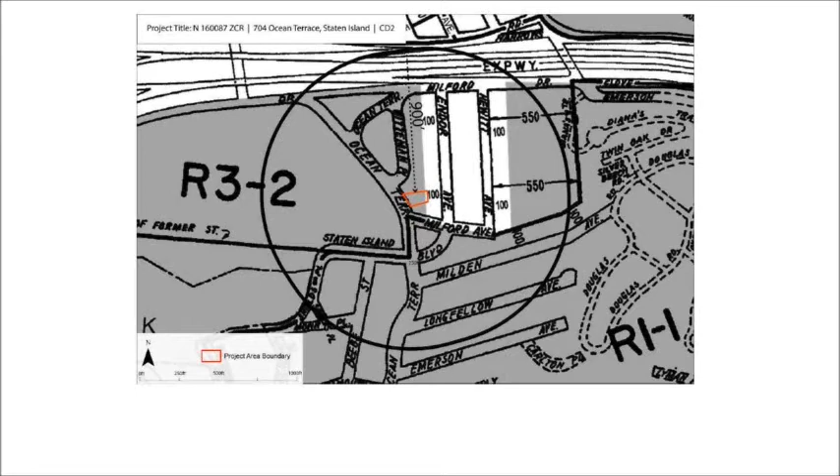The site is in the Special Natural Area District, shown here as a gray tone. The site is outlined in red at the middle of the circle, and you can see the subject site and blocks to the west, north, and east are zoned R3-2. Just south of the site, you see the border on Milford Avenue of an R1-1 district, which extends to the south. Here is an aerial showing the neighborhood context with the site at the center.

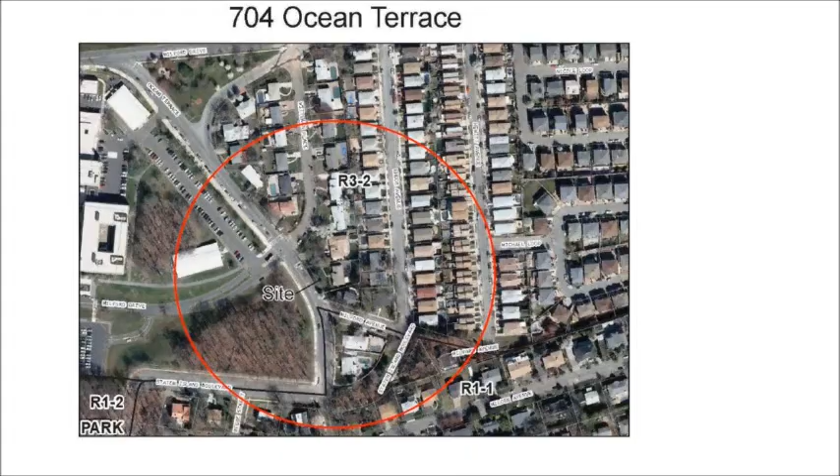The survey: the existing zoning lot is 10,448 square feet. It has 92 feet of frontage on Ocean Terrace, which is a final map street. The site is Tier 1, meaning the topography is relatively flat with an average percent slope of 8%. There's no steep slope on the property, and there are 2 trees in the front yard providing 10 tree credits. There are no other significant natural features on the site as defined in the special district. The existing site has access to a sanitary sewer in Ocean Terrace, and dry wells will collect stormwater.

Here is the proposed site plan. As you can see, that's the footprint in yellow of the single-family house. The proposed development: the applicant proposes to redevelop the site with 4 attached single-family dwellings on the single zoning lot. There will be 8 on-site parking spaces provided at a rate of 2 spaces per single-family dwelling.

All of the proposed development, site alteration, grading, and tree removal are permitted in accordance with the Special Natural Area District regulations, and I can highlight a few things.

Modification of topography is permitted for the building footprint itself and for driveways and required parking. Removal of trees within 15 feet of the building is permitted as of right, and these trees are within 15 feet of the proposed building. There's a replanting requirement of 11 trees for the 10,500 square foot lot, and no construction equipment will go beyond 15 feet of this proposed building footprint.

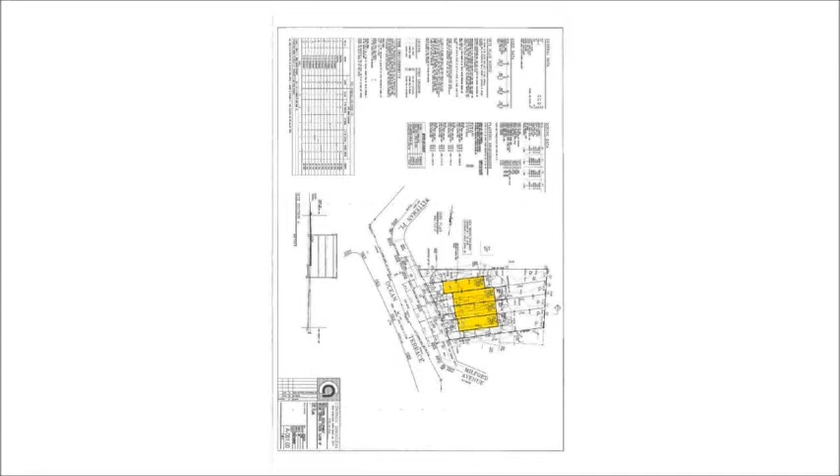First of all, I'm surprised that the applicant would want to develop townhomes at this location. Todt Hill is primarily high-end detached homes. So I was just wondering, the return on investment would basically be the same or greater. Why wouldn't the applicant consider developing this parcel with detached properties instead? The applicant noted in a phone call months ago that they felt individual townhomes are a more marketable product versus a two-family detached. I respectfully disagree.

Mr. Knuckles: Are there any, they don't appear to be in the packet, but do visuals, i.e. elevations, exist of the project? Because the action required does not require elevations, we do not have them in the application.

Any other questions? Mr. Cerullo. I guess it's, yes, there's a question in here. You can make a statement too if you'd like. Caught on to the fact that I actually had a question.

I guess the global, I think the real issue, which I know you're familiar with, and obviously I read the correspondence back and forth. I think this is a good example of a bigger issue, which really involves when you have a zoning designation that permits legally a certain built character, but you have a community that has a different built character.

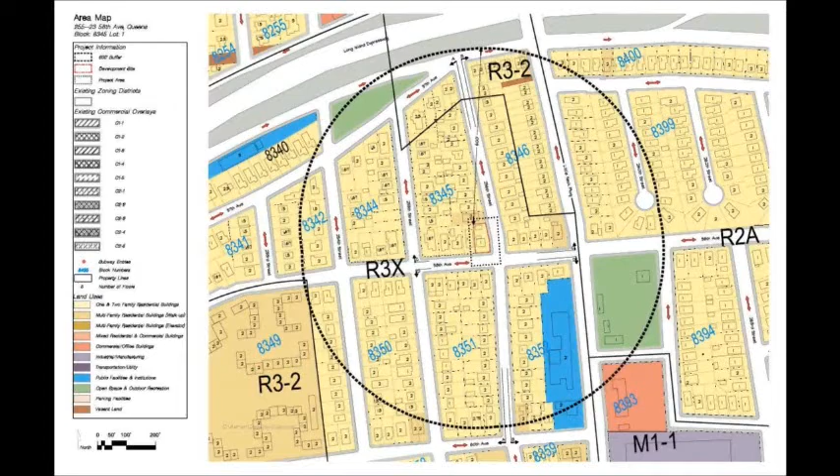In 2006, the city approved zoning changes to the surrounding area as part of the Douglaston Little Neck rezoning to reflect the area's established character and scale. This resulted in this property being rezoned from R3-2 to R3X.

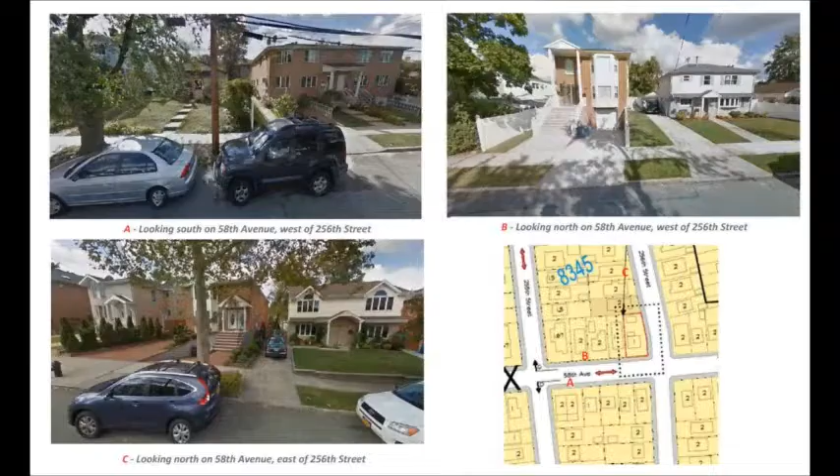Here are a few samples of photos from the immediate area. On the top left is a house looking at 58th Avenue, west of 256th Street - this is two-family homes attached. Here on the photo to the top right is a 2-story, 2-family house. Another 2-story, 2-family house. And then finally in photo C in the bottom left is a single detached 1-family house, indicative of the neighborhood character.

In terms of requested action, the applicant is requesting authorization pursuant to section 2242 to waive the 75% requirement. Per 2242, the CPC may authorize a waiver of the requirement, provided that the commission finds that A, the development is compatible with the scale and character of the surrounding area, and B, the design does not give the appearance of a semi-detached building.

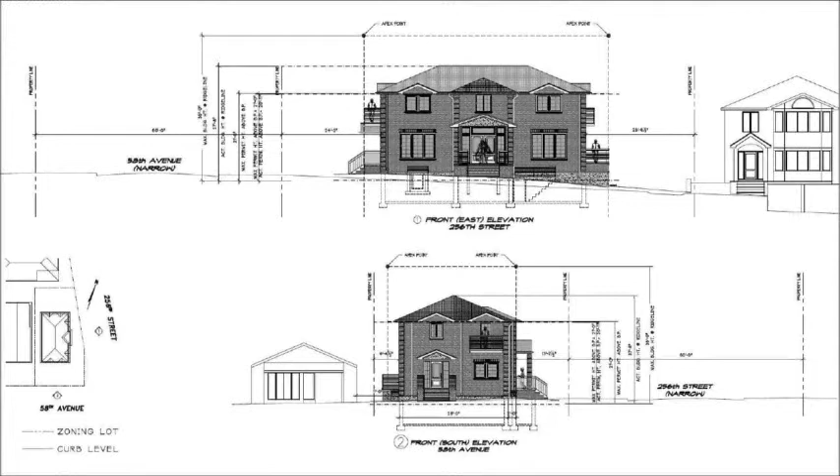Per the applicant, the development is such that it does not give the appearance of a semi-detached building. The bulk of the building follows the as-of-right building envelope, and its form is consistent with other 2-family homes in the vicinity. In this photo, you will see a line here demarcating Unit 2 and the predominant Unit 1 to the right.

The following elements of the proposed building give the appearance of a 2-family detached residence. Traditionally, semi-detached buildings provide 2 entrances facing the same street. The proposed building benefits from the corner location and is designed to provide an entrance for one unit on 58th Avenue, the other on 256th Street. Since there is no party wall, the roof line is continuous. This element is not evident in the roof line, which would normally suggest a semi-detached residence.

Semi-detached residences generally have separate parking access for the units. This proposal will provide access to 2 required parking spaces by way of a single curb cut, indicated here to the north, and a single driveway. Semi-detached buildings usually have separation of yards for each building segment, but the yard for the proposed design is continuous and will give the appearance of a detached building.

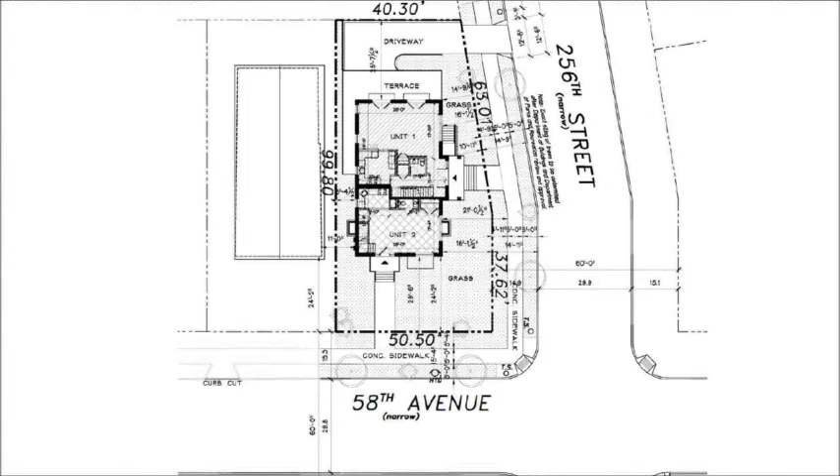Unit 1 will be 1,804 square feet. Unit 2, slightly smaller, at 1,023 square feet. The proposed 2-story building would have an FAR of 0.6, utilizing the attic allowance, and rise to a height of approximately 28 feet. The 2 required parking spaces you can see accessible from the driveway will be accessible by the 10-foot curb cut on 256th Street.

The front yard setback on 58th Avenue is set back to the adjacent front yard depth of 24 feet, and 10 feet on 256th Street. The side yard setbacks are 6 feet on 58th Avenue and 25 feet on 256th Street. The proposed lot coverage is 30%. On May 2nd, the community board voted 29-7 to approve the waiver with no conditions.

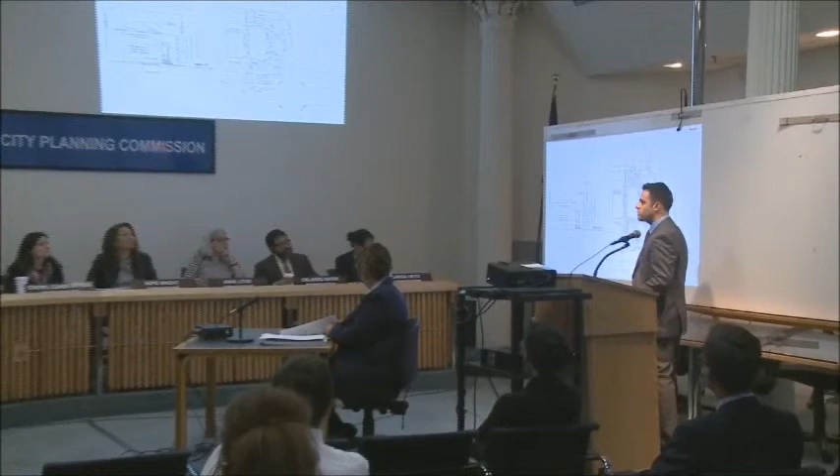It's located in the cellar. Unit 1 will be able to enter through their unit. Unit 2 will have to walk outside into their unit, but it's located in the building. I can pull back to this photo, it shows it a little better here.

So there is a partition between the two spaces? Yes, in this spot there'll be a wall. Unit 1 will be able to enter, Unit 2 will walk around to their entrance. I see, thank you.

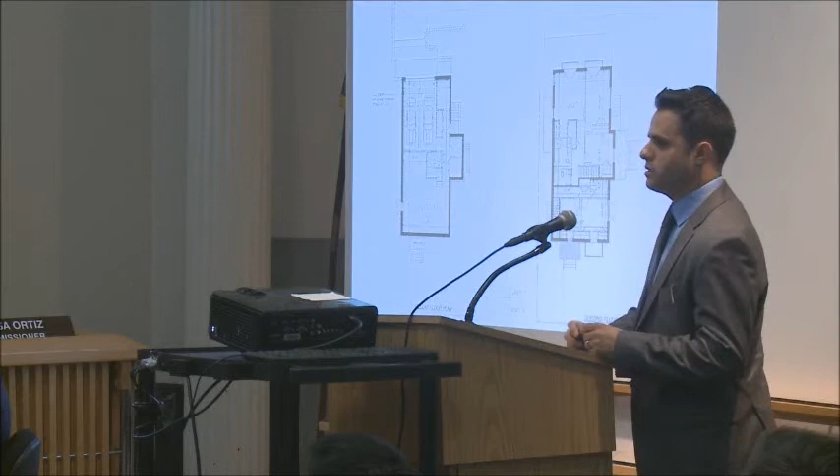Any other questions? Hearing none, this will be scheduled for a vote.

Thank you. Let's now move to item number 11, page 397. It's a Queensbury hearing application with respect to the proposed notice of intent to acquire office space at 36-36 33rd Street, used by the Department of Health and Mental Hygiene. Our presenter is Debbie Carney.

We're on item number 11, page 397, Queensbury hearing. Good afternoon, Commissioners. The Department of Citywide Administrative Services proposes to acquire approximately 27,000 square feet of rentable office space on a portion of the 5th floor at 36-36 33rd Street in Queens Community District 1. This space would be used as offices for the Department of Health and Mental Hygiene, and it would facilitate the expansion of its programs and services. The agency is also hiring a significant number of new staff, and this space would accommodate that growth.

The site is located in Long Island City. It is zoned M1-2 and R6A. It is located in the Dutch Kills subdistrict of the Special Long Island City Mixed Use District, shown in red.

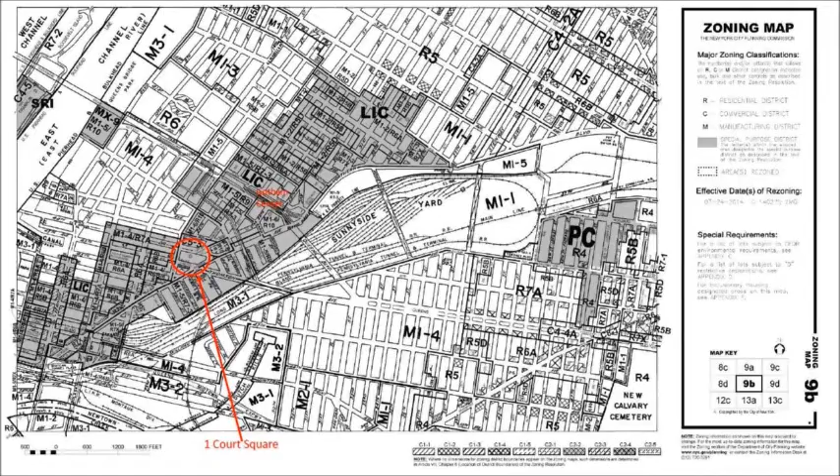One Court Square is located within the Court Square sub-district of the Long Island City Special Mixed-Use District. It's shown here, in the center within the C5-3 district. This is a high-density district. The Special Mixed-Use District is intended to promote varying densities and a mix of long-standing commercial, residential, industrial, and cultural uses.

An FAR of 15 can be obtained within that C5-3 zone if connections are made to subway improvements. Adjacent zoning districts within the Long Island City district provide a mix of densities, as you can see, from mid to high density. And the uses surrounding the site are a mix of, for the most part, low density, but you do have some high-density uses, particularly leading up to Queens Plaza South.

This is a closer look at the building. It's 50 stories high. The agency proposes to acquire 50,000 square feet of office space under a sublease arrangement that runs through April 29th, 2020. DCAS intends to obtain a long-term agreement in the interim. The proposed acquisition will accommodate approximately 250 staff members on the 20th and 24th floors. DOH, the agency, is taking the space largely in its current condition with an existing open space plan with a few existing offices. Citicorp is the only other tenant in the building, and it has great access to the subway system.

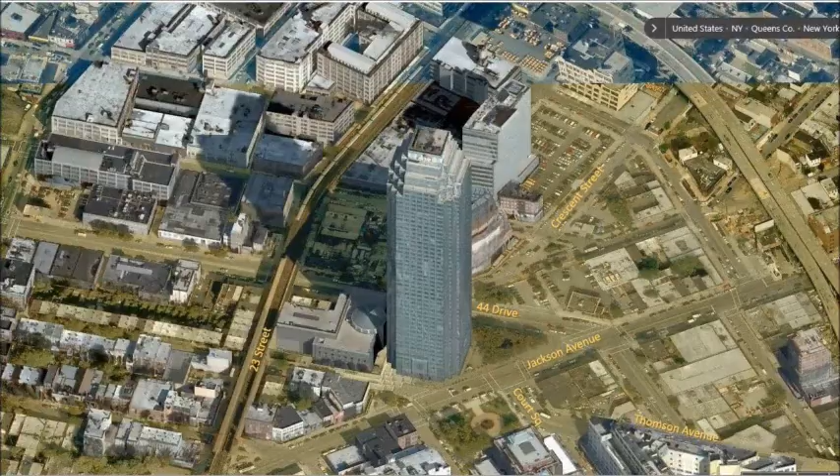This is with respect to One Court Square. Do you know what the vacancy rate is in that building? Oh, gosh, no, I don't, but that's a question we can ask at the public hearing. And I believe that Citicorp has now sold the building to Savanna, is that correct? Yes.

Debbie, can you talk a little bit about what the expansion will accommodate and whether or not the public will be accessing these spaces on a regular basis? These are solely office spaces. There will be no public visitations. Both of these addresses have their own programs that they will be accommodating. For 3636 33rd Street, there are 5 programs listed, including their school health program, their catch vision screening, a program concerning rat reservoirs, areas frequented with rat infestation, and a pet shop regulation program where they can step up on their enforcement activities with pet shops.

With One Court Square, the programs they will be expanding are the New York City SAFE program, the Mental Health Roadmap program, and something called Ending the Epidemic program. There's also the agency's Bureau of Science and Engineering, responsible for monitoring our quality of water, which will also be expanding into that building.